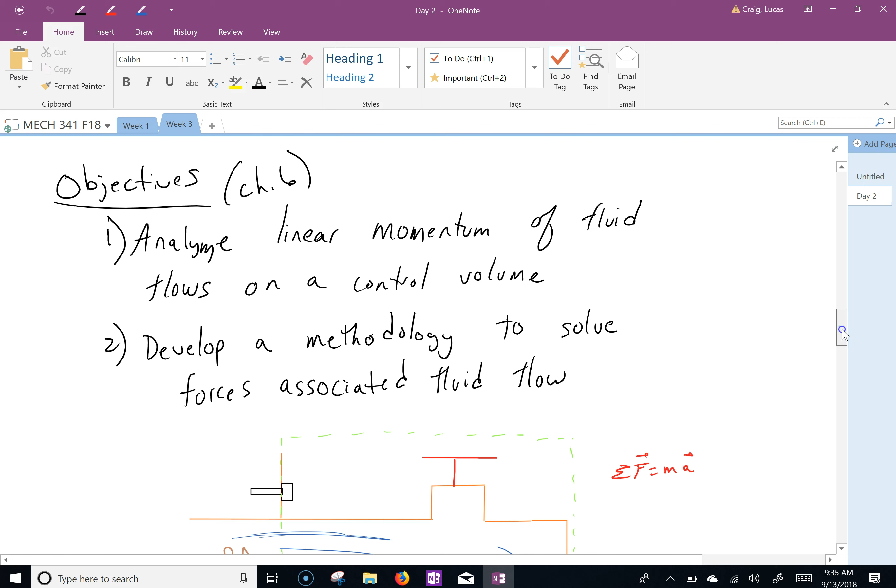Okay, so last class we started looking at, okay, the slide's moving, but the screen isn't moving. There we go. We started looking at really Newton's second law, okay? And when you start doing Newton's second law on fluid that's moving, it's called linear momentum analysis.

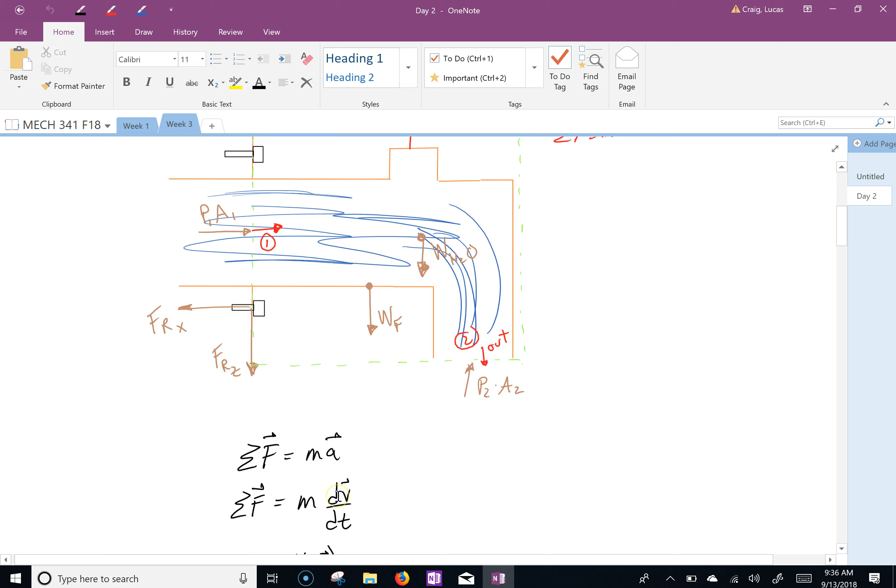And we still start basically with, right there, the sum of the forces equals ma. You still do that. But what we end up doing is we have to add these other two terms here. These other two terms are really the forces generated by the fluid coming in and going out. That's basically what it is.

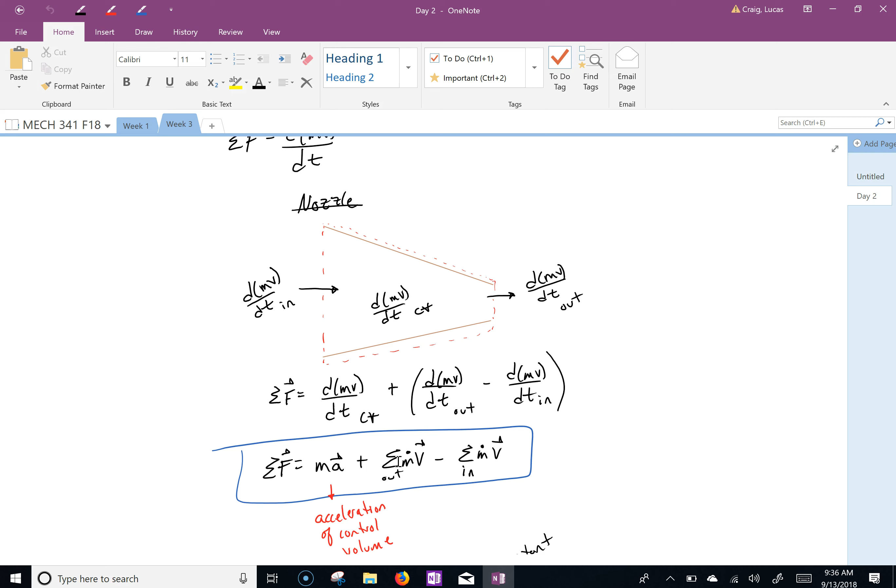And so up here in this spigot, we labeled all the forces: pressure, weight, pressure. Then we labeled what's coming in and what goes out of the fluid. And those are the two forces that we have to include. Because really, you have fluid moving. If you know the mass flow rate of a stream of water and you know its velocity, that gives you the amount of force that if you shot that on a force sensor, you would read.

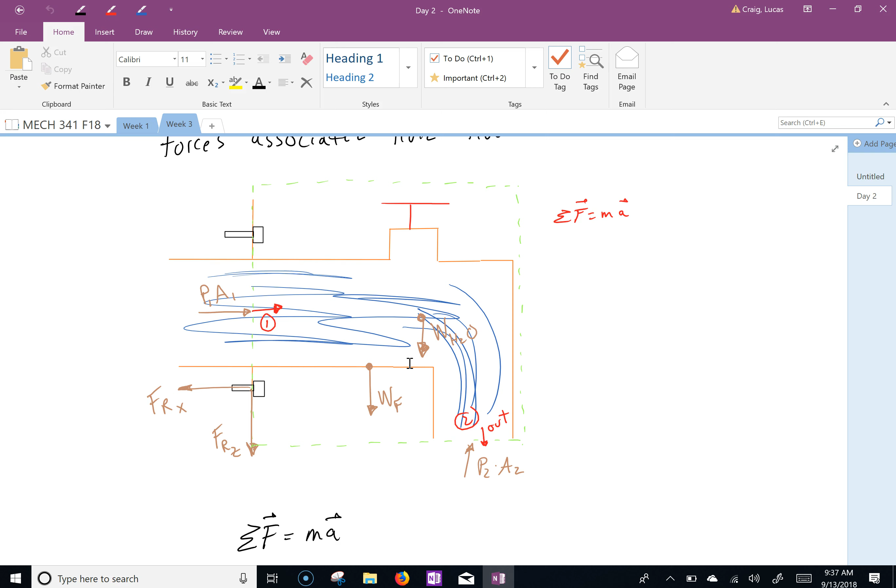Same thing with a helicopter. If a helicopter is going up, if you know the speed at which the air is moving and the mass flow rate of that air, that's basically the thrust that it's creating. And then last class we did this. We had an engine mounted on a stand or a sting, and we wanted to figure out what the actual thrust would be. Because this isn't moving, the reaction force is kind of our thrust.

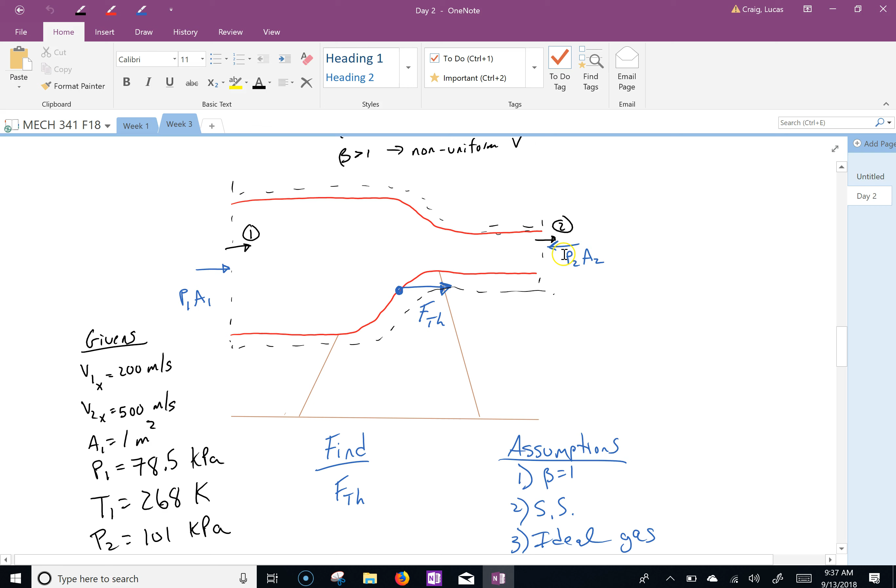So here we have our control volume, which is the black. We have the red thing, which is our engine. We have our pressure forces, and we then did Newton's second law in the x direction, or linear momentum, to figure out what this thrust force would be. So you have to include all your external forces and all these momentum forces from the fluid on the right. Questions on that? Does that make sense?

So fluid could be air, it could be water, and one of the homework problems, I think, is a snowblower. So snow can still act as a fluid. You can have snow coming into the snowblower and then it shoots out at an angle. The next time you're snowblowing, you're going to be hopefully thinking about linear momentum.

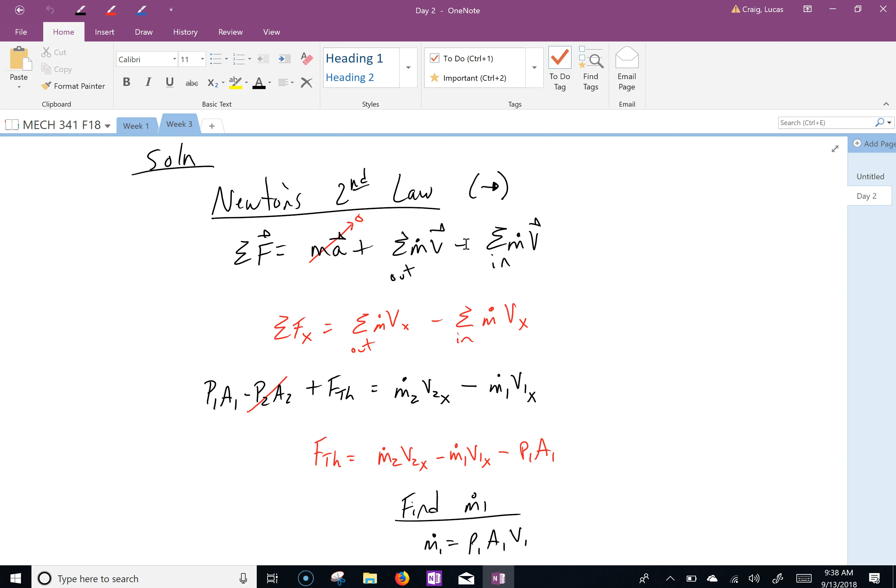Okay? I want to get into the warmth. You want to get into the warmth? Yeah.

All right. Then we did this one. Oh yeah, I forgot we did this one. So here we have some sort of water nozzle, and we wanted to figure out the reaction force in the x direction to hold it there so it doesn't move. How many times have you had the shower head at the bottom in your shower? Maybe some of you don't have the tube that hangs down. Yeah, the detachable one. I have one.

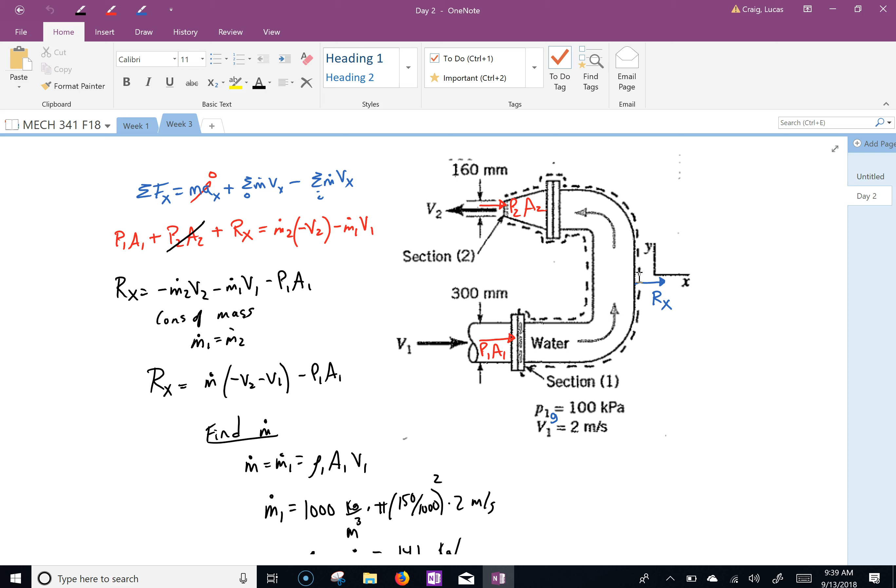Sometimes I forget, and my wife turns it on, and then what happens? It shoots backwards, and it goes all over. Well, all those little holes shoot out at some mass flow rate, some force, and then, if you know all that, you can figure out how much force you need to hold it back. That's all this is.

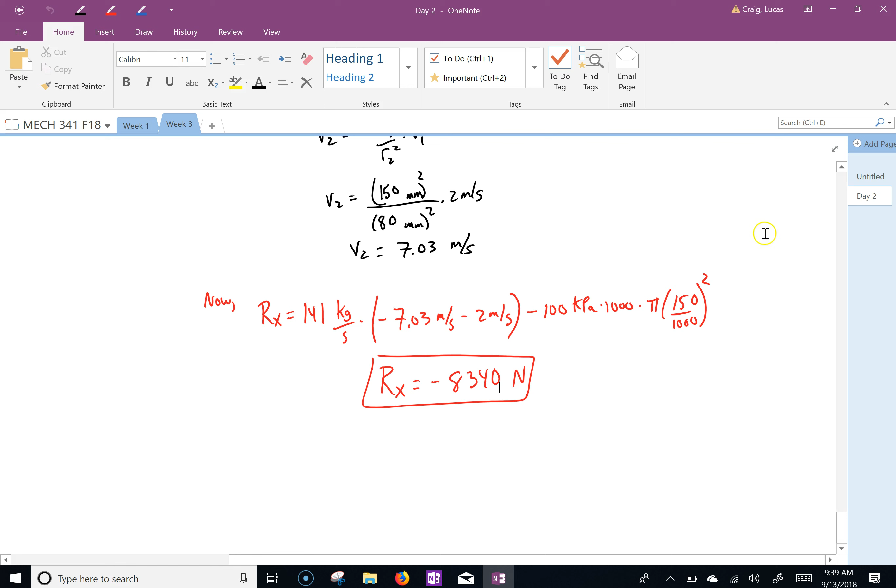All right, so let's do another pipe problem, but for this one I'm going to add a page. So this is week 4, day 1. What we're going to do now is another pipe problem, but a slightly different way of analyzing it, because you need a different equation. So let's make a sketch here. That's much better. Oh, I should have been doing that a long time ago. Oh, come on.

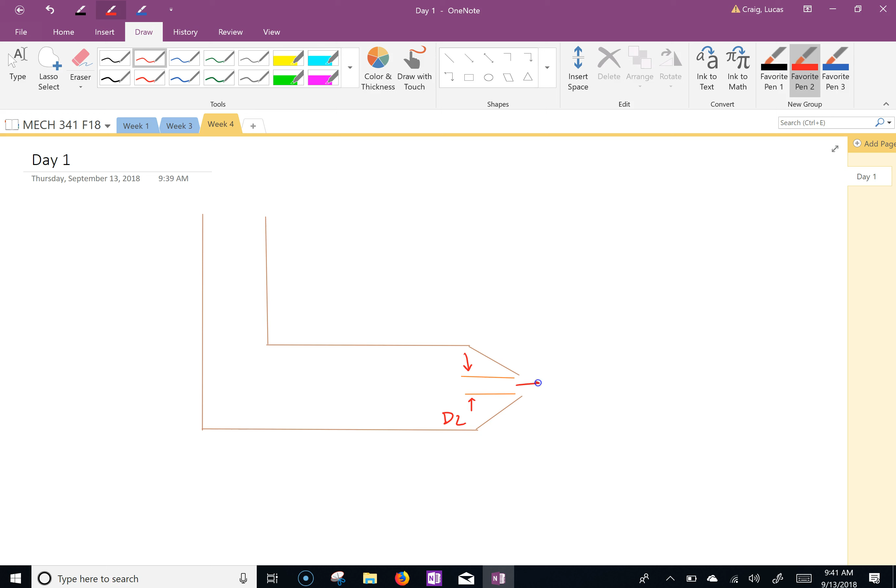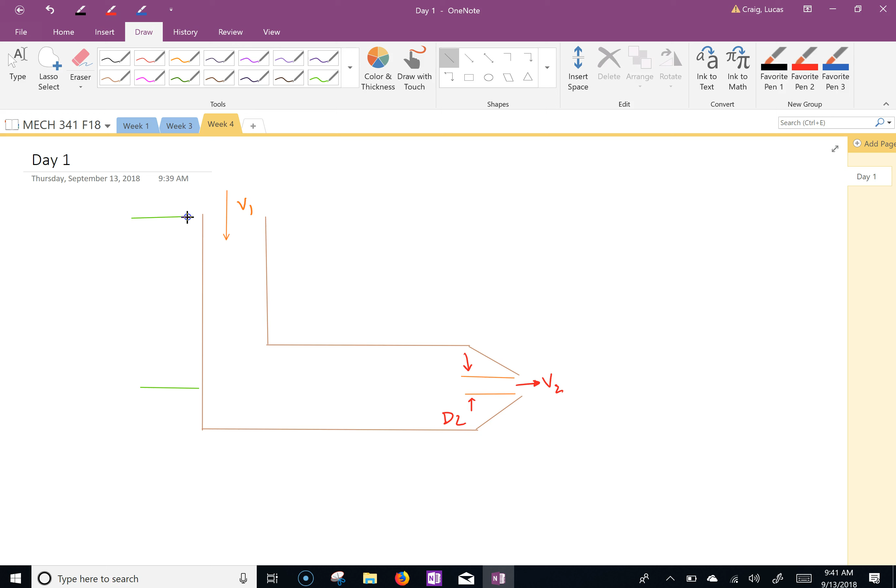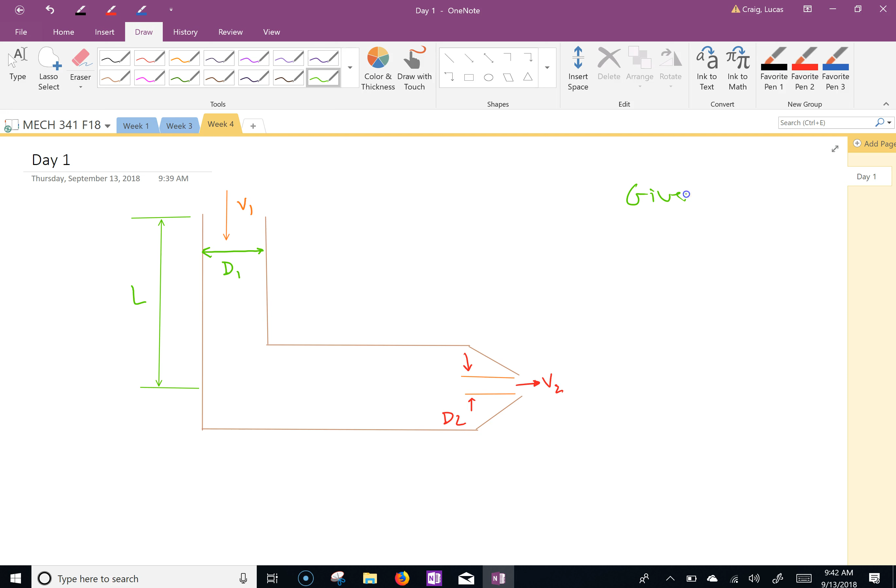So the diameter of this exit is D2, and it comes out here at V2, comes in here at V1, and let's make it light green. And how do I write there? L. And the inlet here has a diameter D1. D1 is the green, okay? Yep. We got 9 centimeters, D1.

Really quiet this morning. Tired? They're just eager to learn. That's good.

5 centimeters. Kind of something new, right? I mean, you've kind of seen this in forces, but not really with fluids. So there's water in here shooting around this.

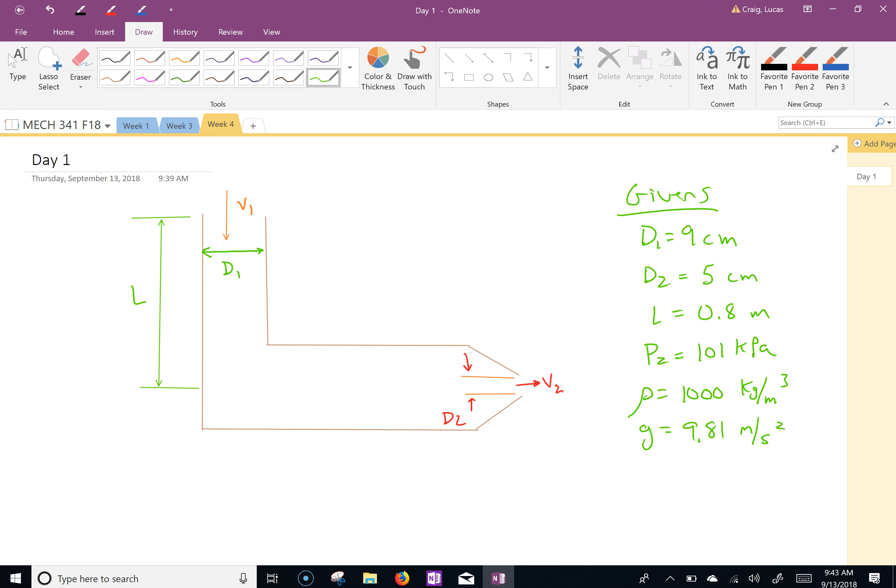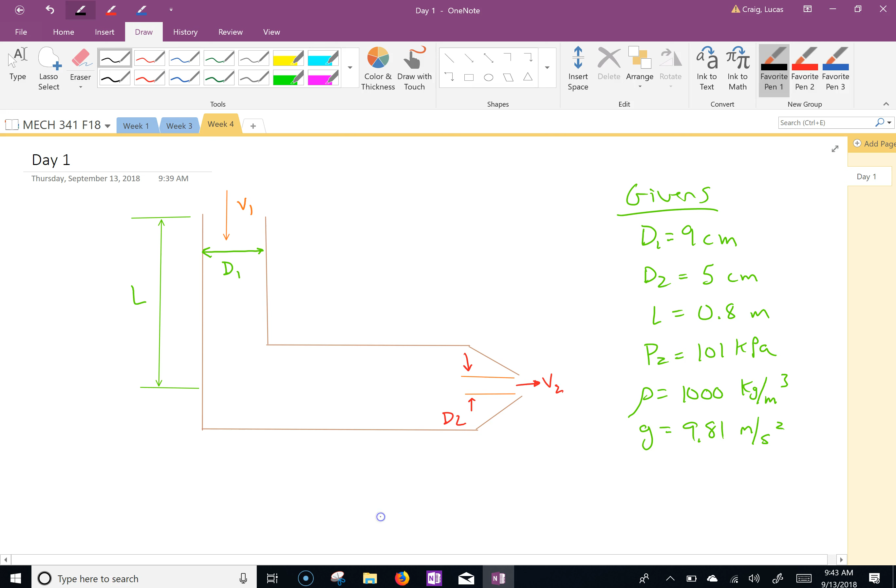Oh, and we might as well make a boundary. Can I do dots? No, but I can do this. Oh, I don't want that color though. There. So here is, the black is our control volume. So give me some forces acting on that control volume.

At where? 2? Good question. At state 1, we cut it. There's a pipe there, so the water comes in. So there's a longer pipe up here, and we just kind of cut it right here. We know the pressure here, the gauge pressure. So yeah, there's actually going to be P1 gauge times A1 as a force. And then at state 2, it's going to be P2 gauge A2.

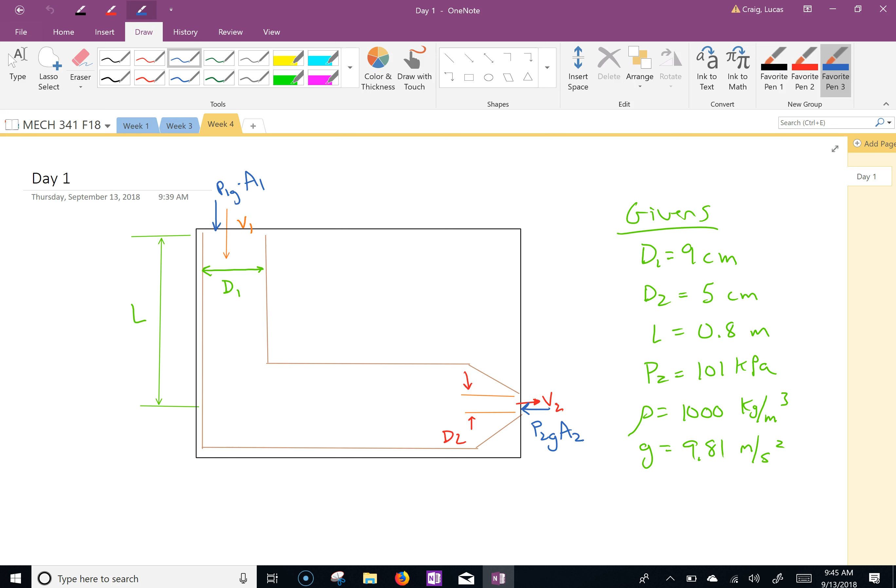And we know over here there's going to be some resultant force FR. And we can split that up into components, so we have Fx and Fy. So if we wanted to build like a little stand or design something, we can hold it at that spot right there, okay?

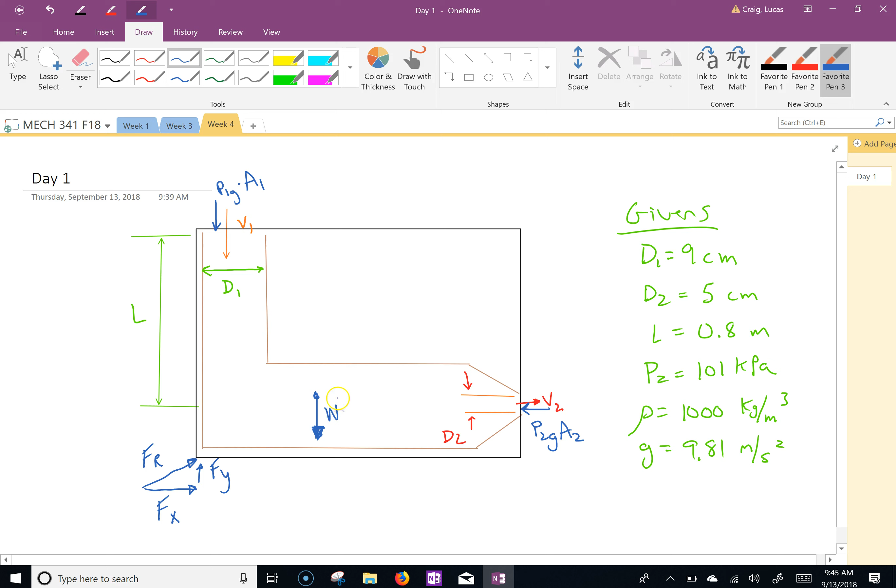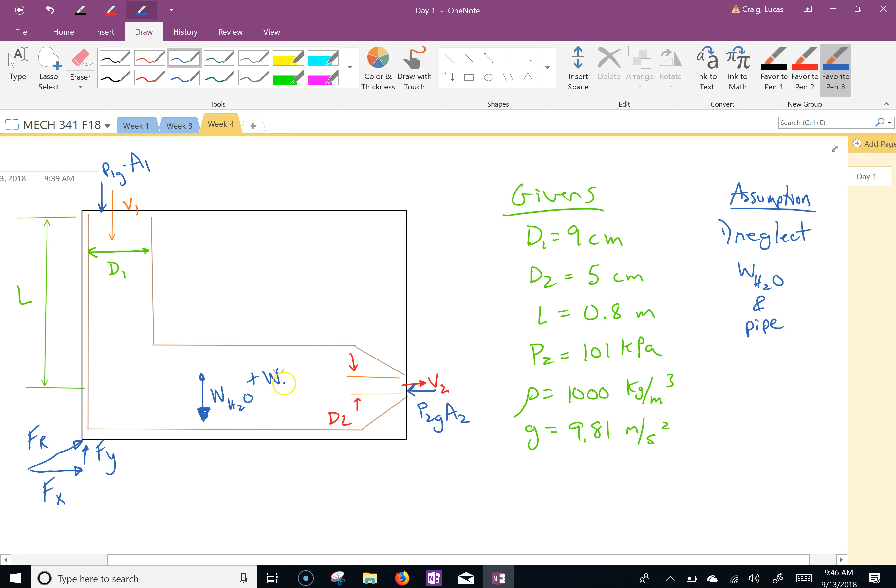The other thing we have is the weight of the water. We're actually going to neglect that, so that would be an assumption that we can write down. You could include it if you wanted to, but it doesn't make a huge difference. And I guess the pipe, right? You could include W of the pipe. Typically, those are kind of small compared to what the forces of the fluid are going to get.

So, other assumptions. H2O is incompressible, so that validates our density. We have 2D flow at steady state. And do you remember beta? Beta equals 1, meaning that V1 and V2 are uniform at the inlet and outlet. And when you do the ANSYS, you'll see that typically in a lot of the pipe flows, betas are not 1. The velocity at the outlet or inlet isn't usually going to be the same all the time. Okay?

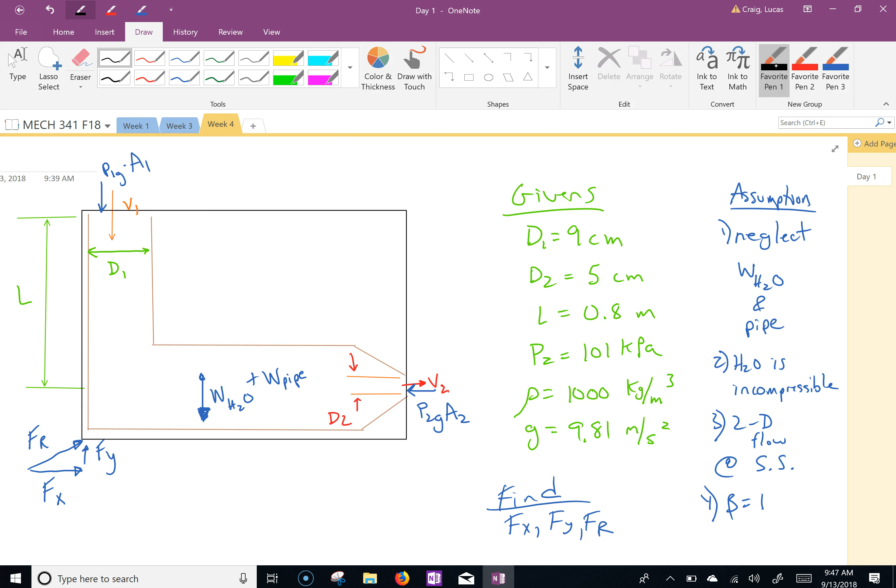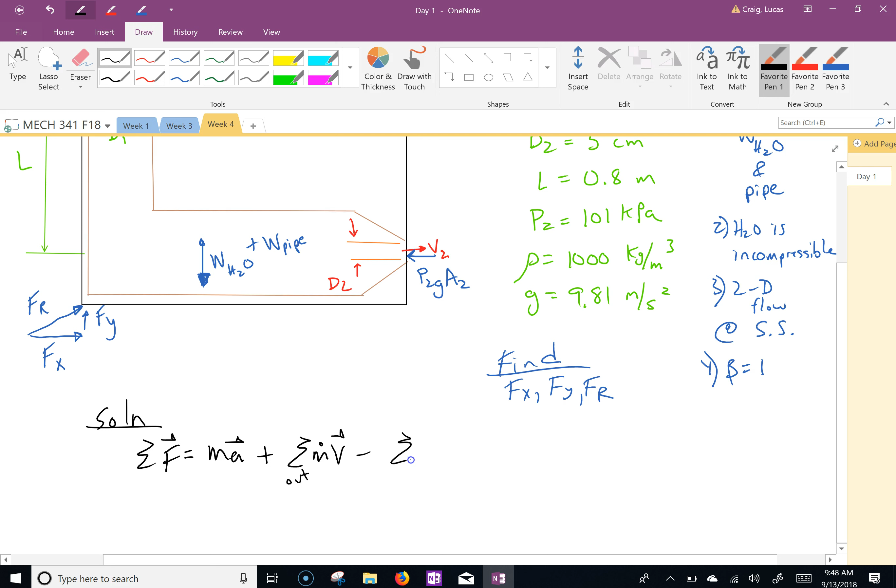Okay, where do we start? We need to write or find Fx, Fy, and the resultant Fr. So we did our free body diagram. We labeled what's going in and going out for velocities. Now we can start the solution. So we're going to start always with this. I meant to ask you about the subscript X on those also, is it only the X direction that we're concerned with? On the last problem, it is, but this one is 2D, so we're going to have X and Y. Yep. And actually, I forgot a heading: Newton's second law.

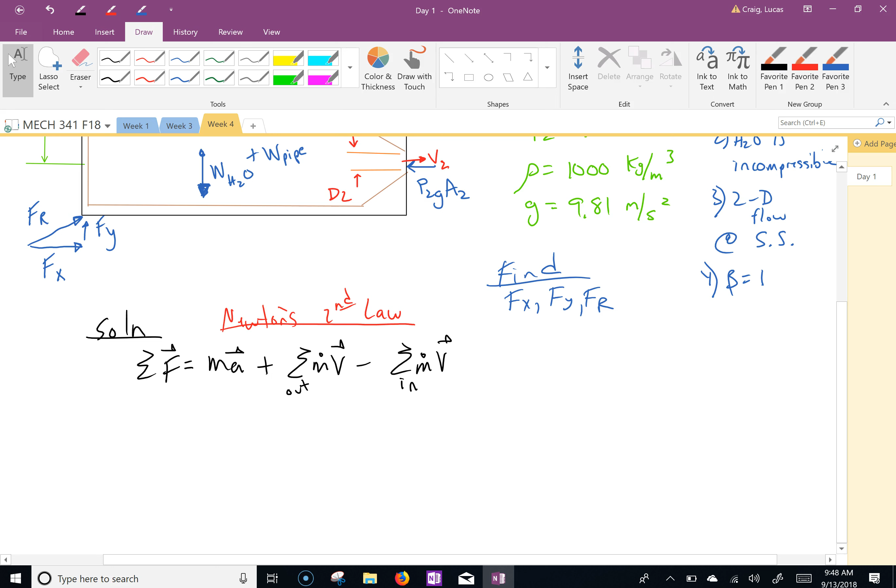So, we're going to have two directions. But what can we cancel first off in that? MA, because that nozzle, we're going to assume it's stationary. We don't want it to move, okay? Then we have the X direction and the Y direction. Now, you've also seen the I direction and the J direction, right? X is used for I, so don't worry about all that. I like to stick with just X and Y, so I'm just gonna rewrite this. It's easier for me. I'm okay if you don't, but if you mess up, then I'll tell you maybe you should have written that down.

I like making comments like that on your paper. Like, the beginning fluid students. I know I told them to do this problem just like this. What do they do? Don't even do it right.

Don't even label anything. Oh, these aren't vectors, sorry. Those would be X, right? I got carried away.

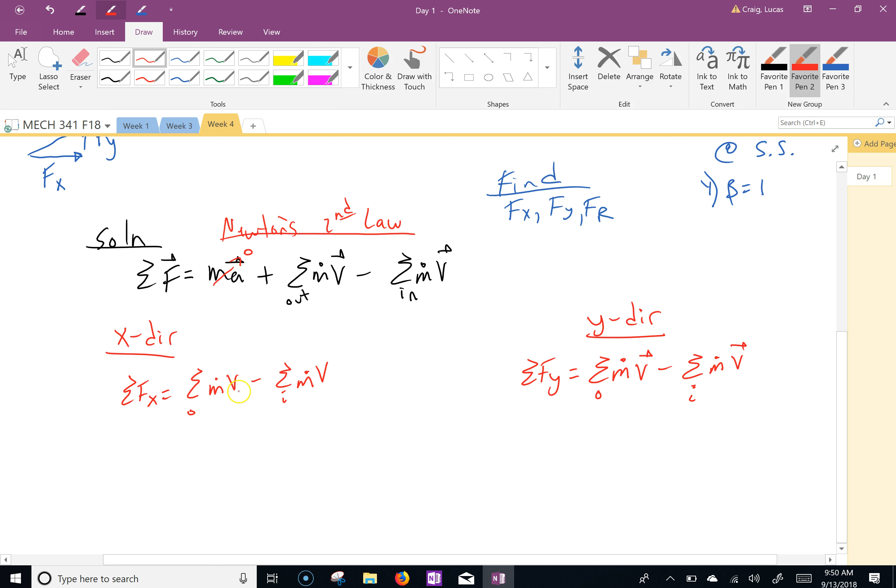Now you can write a comment about me.

All right. We okay right now? Keep going. Forces in the X. I have positive Fx. I have minus P2 gauge A2.

Where's that coming from? Sounds like it's over here. It's all offices out there, though. Yeah. Big conference room. It could be. Maybe there's a conference in there too.

What, in the X direction, do we have anything coming in for fluid? We only have it going out, right? Right. And what do we call that subscript? 2. So can you cancel the M dot with some? Yeah, sure. Yeah, that's 0. I was wondering what you were asking. Yeah, you can do that. What about P2 gauge? It's 0. We can get rid of that one too. The X direction is weird. Yeah. Because we do gauge.

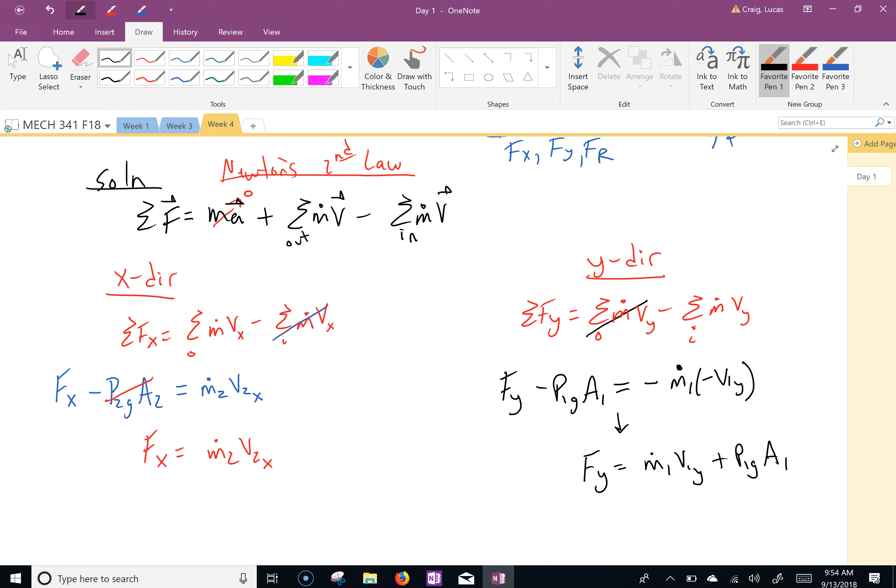To find pressure, to find mass flow rate, you've done that in basic fluids. So, what do you want to find first? You want a mass flow rate? Okay. Can we do something first? Conservation of mass to help. What does that state? M dot 1 equals M dot 2. Exactly, because the mass flow rate in equals mass flow rate out. And we'll just call it m dot.

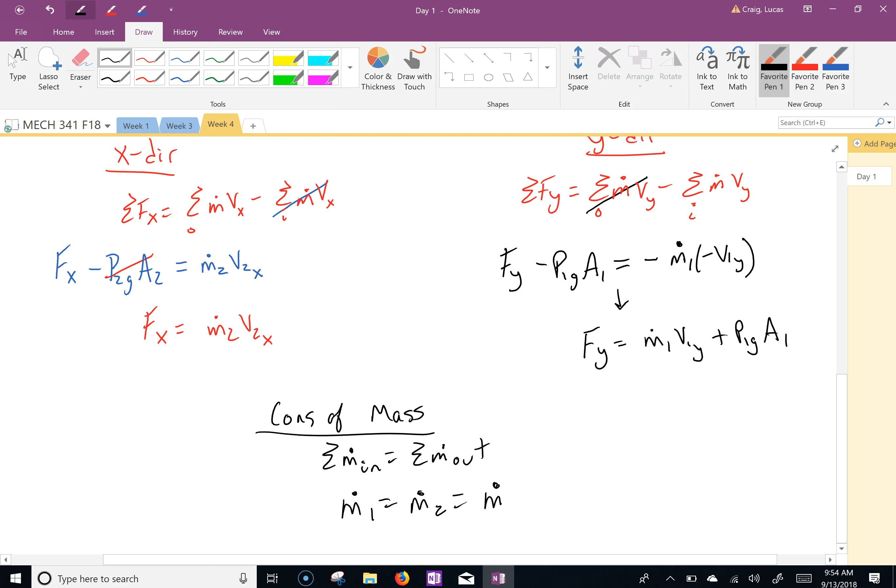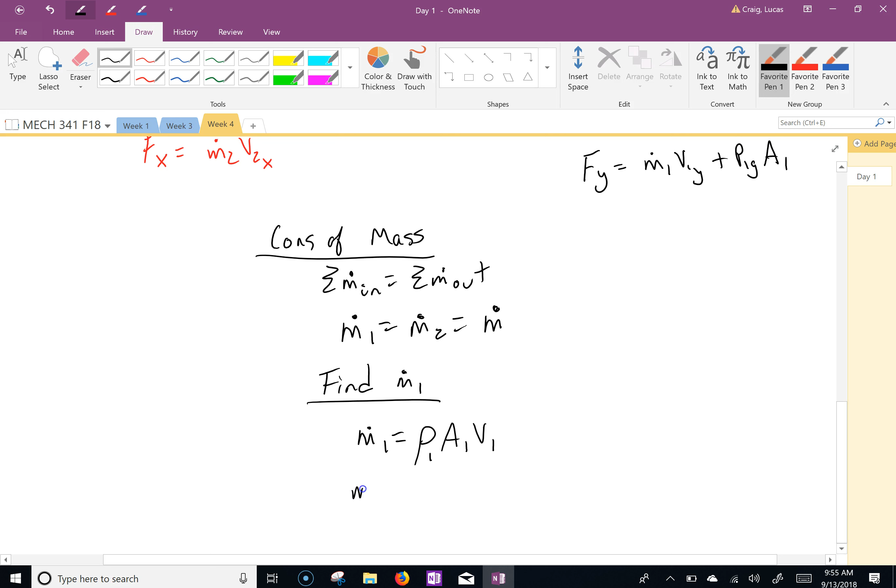And then we can now find m dot 1, which is rho 1 A1 V1. Density is 1,000 kilograms per meter cubed times pi. Oh, I'll break my rule. I don't care. You've graduated.

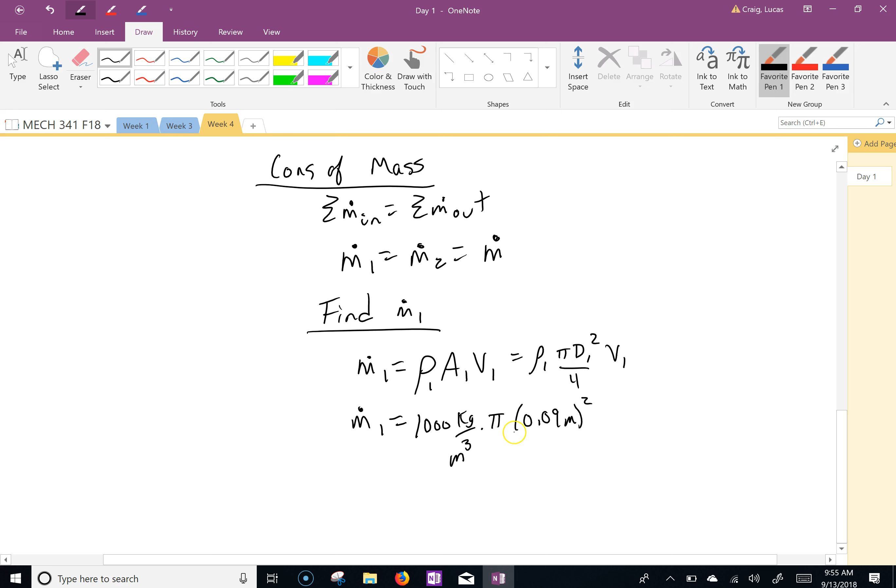Come on, erase. Is it pi d squared over 4? Yeah, let's do that. So diameter 0.09 meters squared over 4. And then times 6 meters per second. Did I miss something? 1000 pi d. Nope. And you end up getting 38.17 kilograms per second.

I think that was where we go down the velocity. V2. No, only V1. Oh, did I write that? Not write that in the givens? No. Oh, I'm making stuff up. You're right. My bad. I didn't give you V2, but you can find it, right?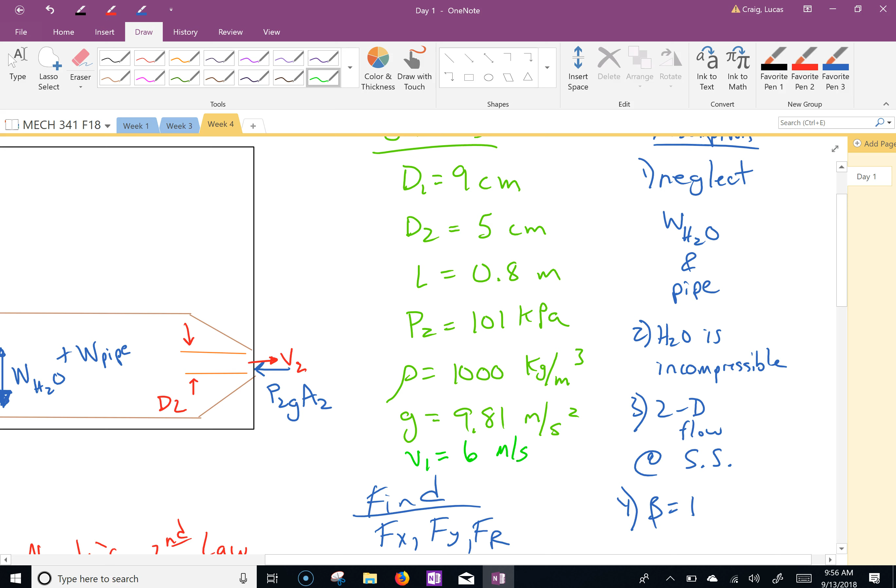What direction is V1? It's going in the y direction or the j direction. Yep. So if you wrote it in vectors, it would be 0i plus negative 6j, right? Just for reference for any future stuff. Wait, are you going to give us velocity in vectors? I won't. But just for future, if you have engineering from another school, they might do that, just to remember. Okay, yep, we got it.

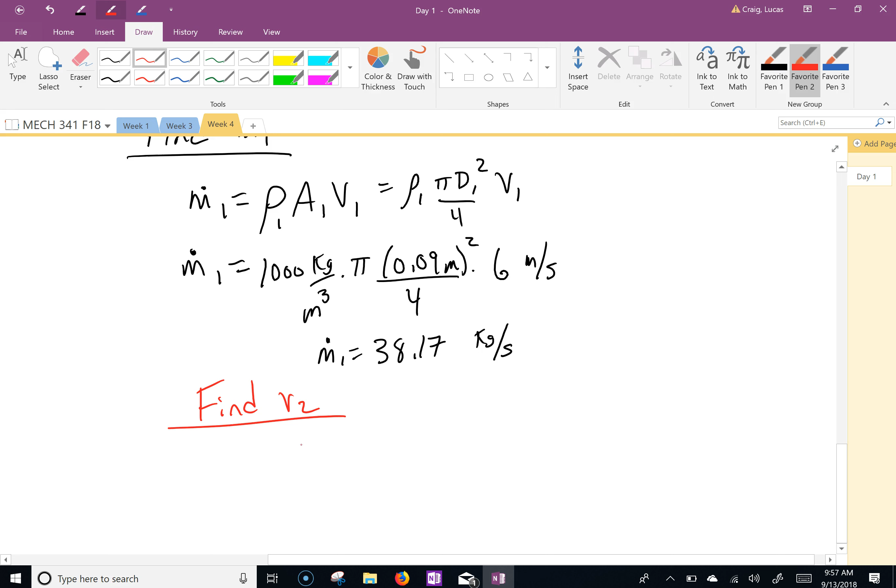Okay, now we can find V2. So we know that m dot 2 is rho 2 A2 V2. We'll solve for V2. And just to save some time, you get 19.4 meters per second. And just for future too, the area 2, because we're going to need to know that maybe, or if you found it, this area is 0.00196 meters squared, just to have it.

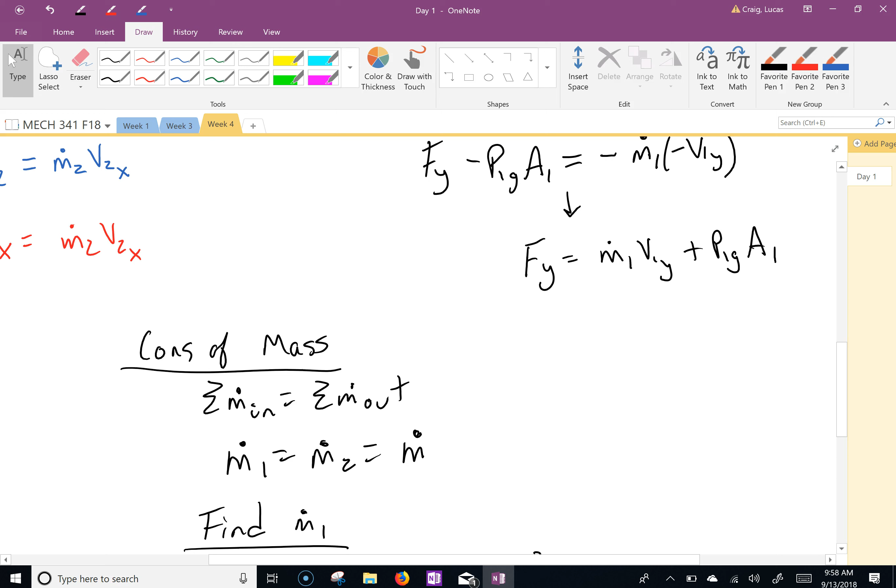Okay, so we go back up to our main equation here. We could solve Fx, right? But we might as well find everything we need and then solve them at the end. The only last thing we're missing is P1 gauge. How do we find that? Close. Close. You don't have to have atmospheric pressure. You guys are thinking right. So we're dealing with fluid, right? Rho RT? No, no. That's only for a gas. Oh. Only for a gas. Okay.

So I labeled state 1 coming in and 2 going out. What do we know about those 2 points? Certain distance. Yeah, so there's what Garrett was saying, something to do with G. Rho GH. Well, not quite rho GH, but MGH or something like that. What do we know is true at point 1 and point 2? Did it in fluids, second half of fluids. Big, long, famous equation. Bernoulli's, which means the energy of a fluid is conserved at 1 and 2. So we can use Bernoulli's.

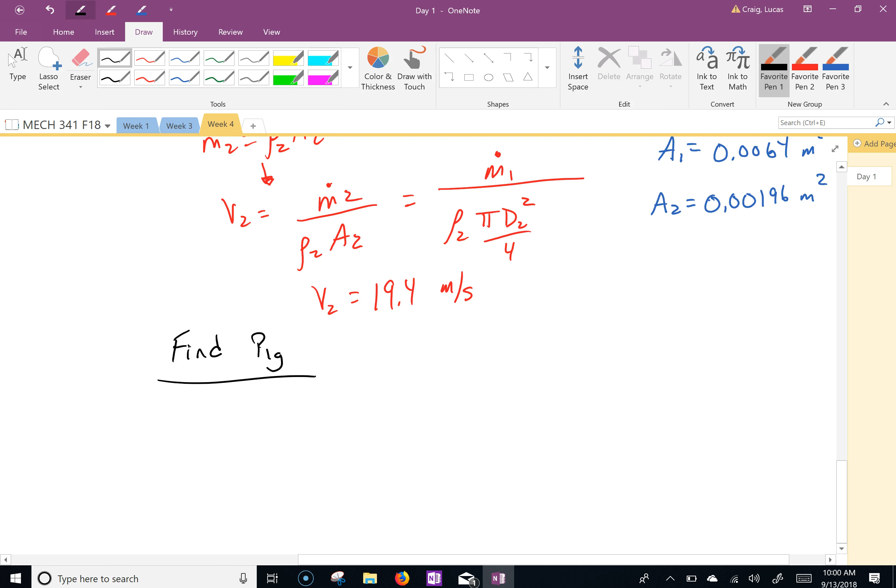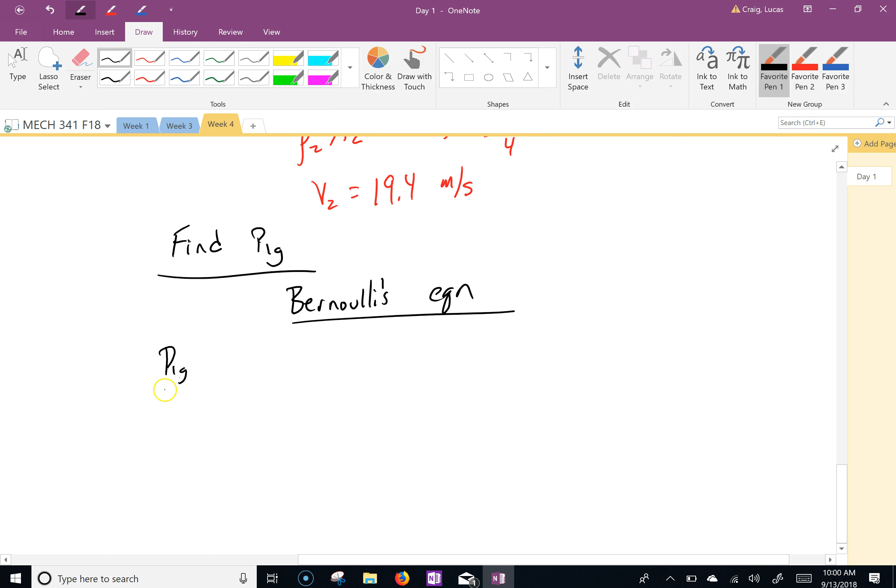Do you remember that equation? P1 gauge over rho plus V1 squared over 2 plus GZ, not rho GH or MGH. The Z's for height, right? Yes. That is going to be in the given. Pretty much, it's almost a guarantee in any problem to use G now, right? You almost don't even need to because you know the numbers by heart.

So where's our datum? At 2, yep. So that means what? That term's gone. Z1 is 0.8 meters. Did I give you that? I didn't give you L either? Okay. I didn't call it Z1. Do you remember the modified Bernoulli's?

Vaguely, David? After this, you don't write this down, so nothing in blue, but here you would add what? H of a pump, and your head loss too, minor and major, and then the turbine. So that's what you would add right there. But I don't think this is quite right because these are in terms of energy. We did every one in terms of meters, right? But yeah, you would have pump energy, turbine energy, which you subtract, and major and minor losses.

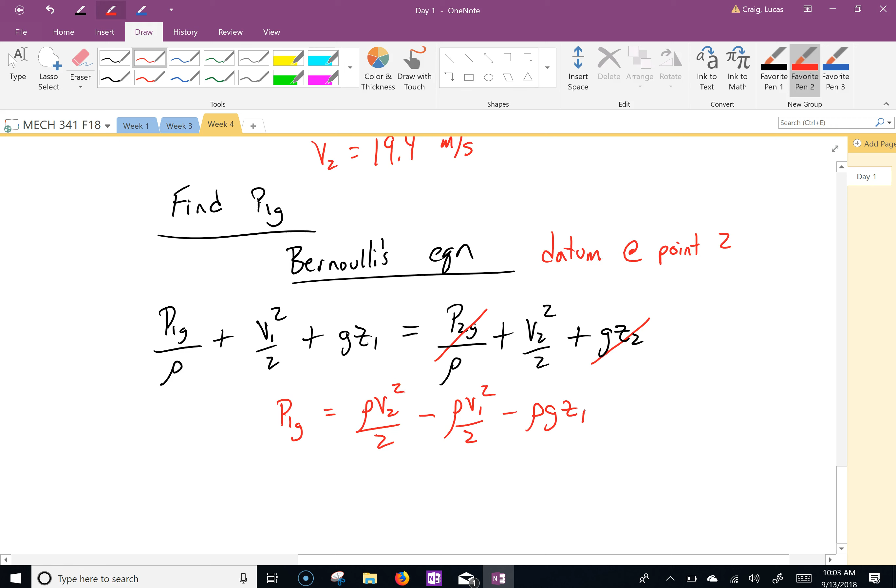I am going to factor out the density, so I have to write it three times. 19.4 meters per second squared in that whole term, not the whole term, just the top term is squared, minus 6 meters per second squared, over 2, minus 9.81 meters per second squared, 0.8 meters.

And again, do you know why we do gauge pressures? Because if you add, like if you look here, Bernoulli's is the easiest way. If we add 101,000 on the left and we keep 101,000 on the right, and you bring one over, it cancels. Okay? So there's no reason to add more numbers than you need to. It's the same way we do it in Newton's law.

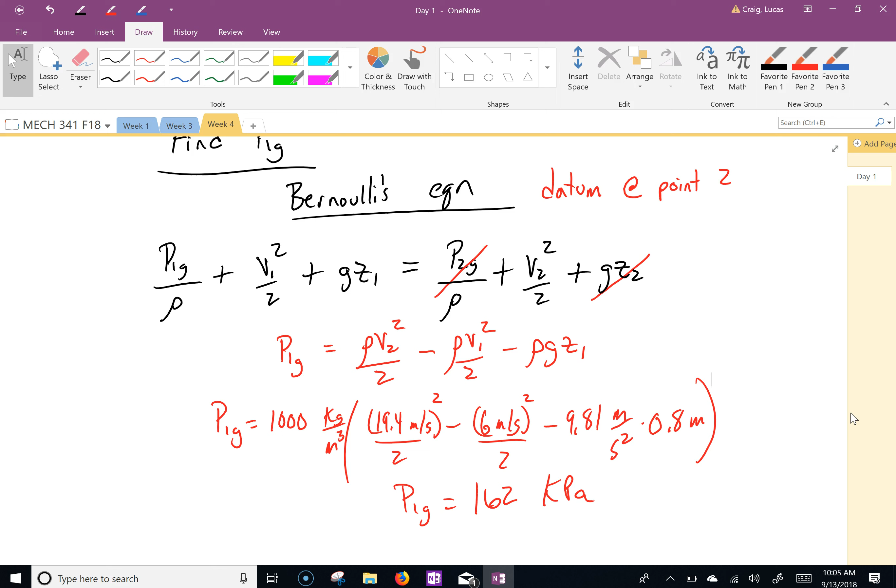So now we can finish, right? So now F of x equals 38.17 kilograms per second times 19.4 meters per second. Get 740 newtons.

And I'll do the y direction. 38.17 kilograms per second, 6 meters per second, plus 162 kilopascals times 0.0064 meters squared. 1268 newtons.

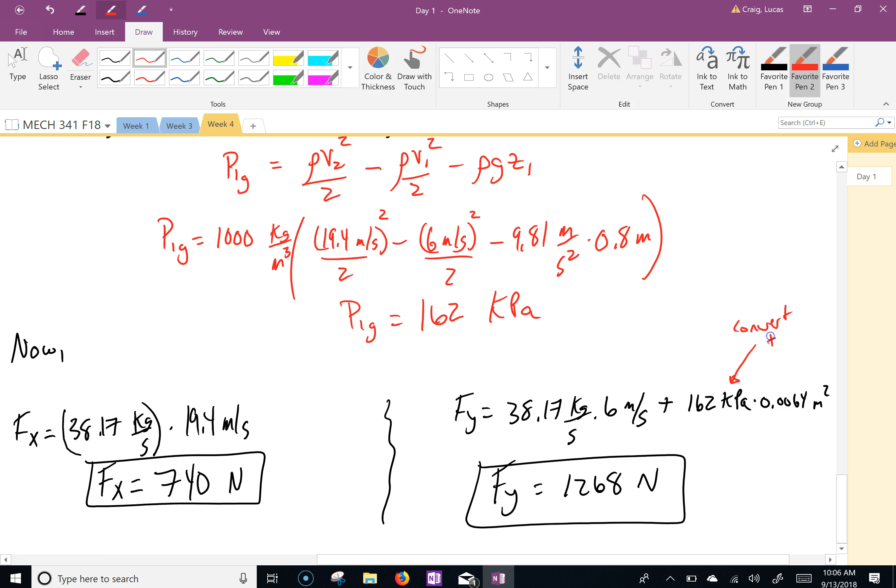Make sure you convert to pascals here. And then finally, when you do that, you get 1468 newtons.

I never did the angle, so if someone has a calculator, could you check that for me? Oh, I did do the angle. Huh.

What's that? Yeah, it's pretty good force, right? I mean, it's shooting out. What was the speed? 6 meters? 19.4 meters per second, which is pretty fast. Yeah, because 10 meters per second is roughly about 20 miles per hour. So that's almost 40 to 45 miles per hour coming out of there. Whew. When you stick your hand out the car window going 30, it's pretty good, right?

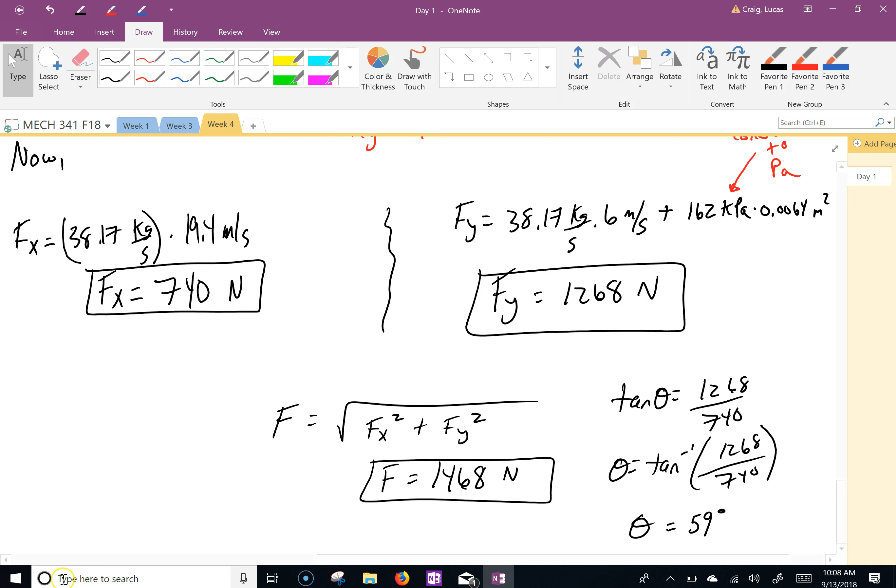So I'm going to pause this. This one I can pause. Okay, so we have water being discharged, and it shoots along this cart at 45, and then shoots out here at an angle. We're assuming that the water gap along that cart is the same from here all the way up to there. We know it's not, but this gives a good approximation.

Okay, we want to figure out what? Determine the tension in the cord to hold it there and the normal reaction of the wheels on the cart. Given the nozzle diameter, which we're going to assume is the water, and the density of water is 1,000 kilograms per meter cubed.

So how do we go about doing this? Exactly, yep. If I told you that somehow that cart was accelerating with thrust, but we wanted to figure out the tension, we would do a free body diagram on what? The cart? Yeah, okay. Remember that problem? I think you did this problem. Some of you haven't yet in dynamics that aren't in it. Remember the block sliding down a cart?

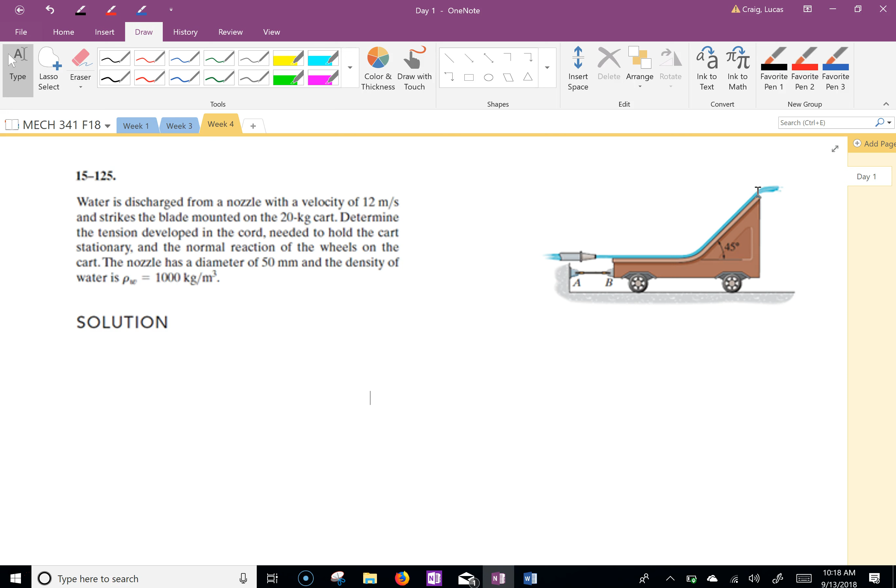Yeah, find the tension? Well, it's very similar. So let's first, right now, do a free body diagram. And I'm just going to do, actually, why don't I do this? I am going to, no, I'll just do this. Let's pretend the dot here is the cart. So give me one force acting on this cart. Or like, what do you mean by that?

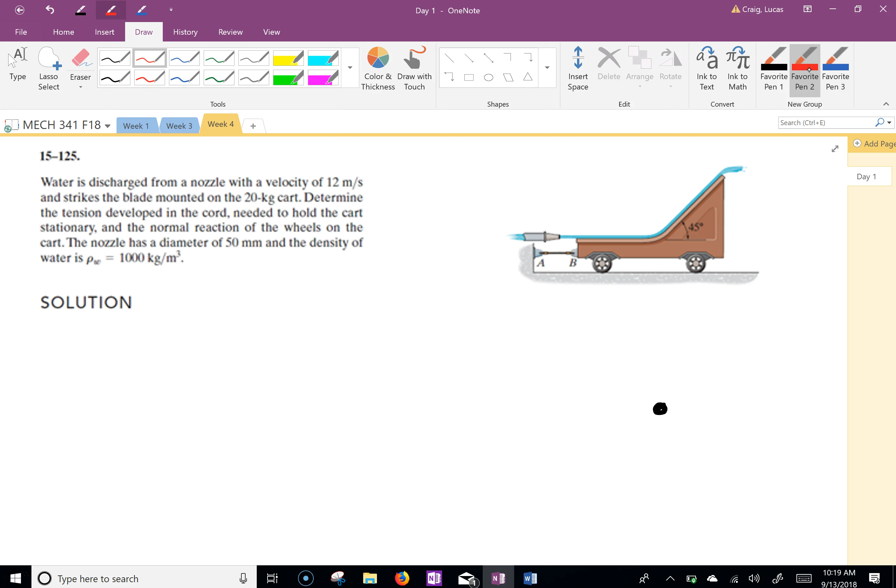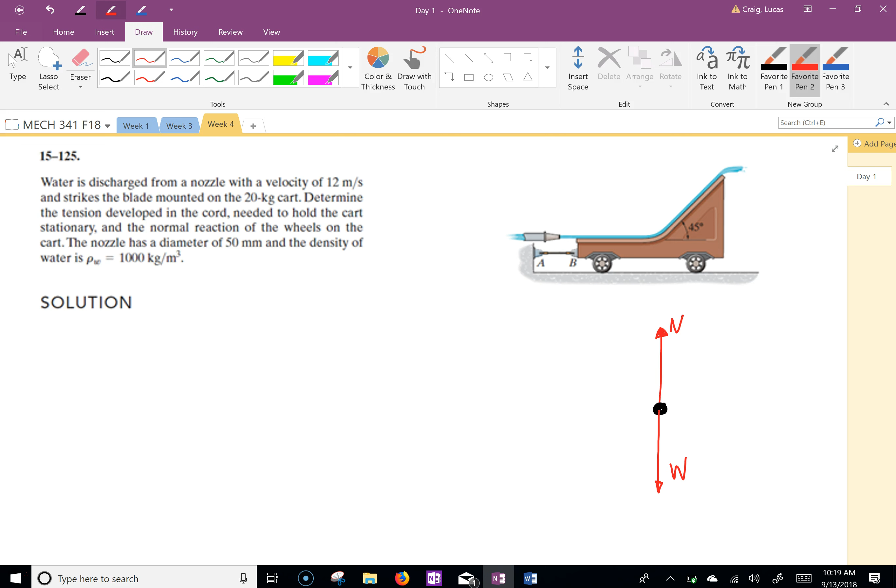Friction. I'm trying to think what it is. Okay, so we got, in the X direction, right? Oh no, no, that's we'll get to there. Weight. Then we have, I think someone said normal. We're going to assume it's, does it say anything with frictionless? No, we'll assume in the X direction there's no friction, okay? Force of the water. Yes, I'm going to get to that in a minute. What's the last major force? Tension, yeah. Now, the water, because it hits at 45 degrees, has to be how many directions?

Two. So we know there's going to be F of x, and I'm going to go down F of y. So this is the FBD on the cart.

Now, if you remember the block sliding down the cart, what did we also have to do a free body diagram on in that problem? The block. Well, here we have water, so you have to do a free body diagram on the water. Okay? So here is the water. And then this shoots at 45.

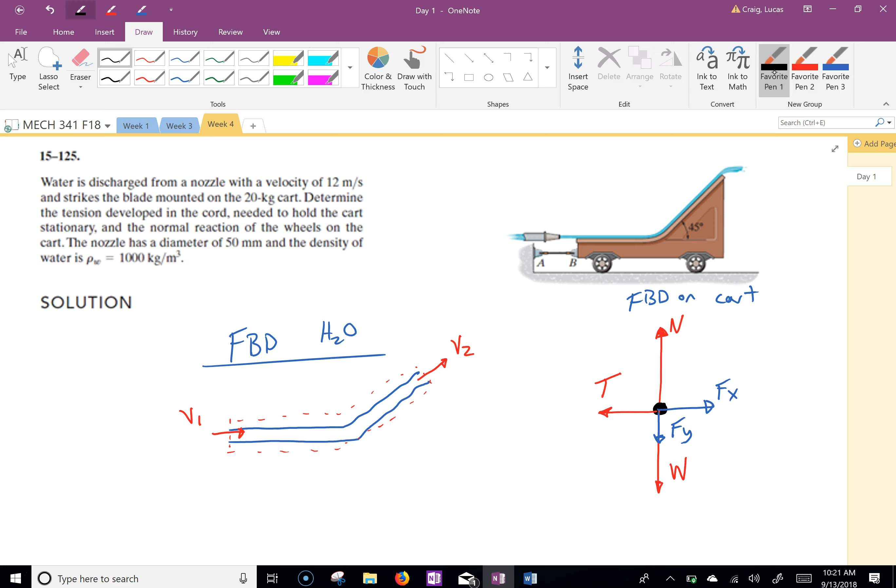And that's kind of where our control volume is. So this is V2, comes in at V1. So I guess we might as well write some assumptions here. Neglect friction, right? I need to plug this in.

You know what they should make is power cords that are a little thicker, but they have all this stuff in it. It always hangs down and then it pulls my computer down unless I put it on a chair.

New capstone. Actually, we were fishing the other day, and I 3D printed cleat boat covers to fit on his boat because we've broken two now. We put the pole down when we're fishing to grab another pole to cast. Well, it goes underneath the cleat where you wrap the rope around to hold on the dock. And then I hurry up and grab the pole, I pick it up and it snaps. So I 3D printed the cleat holders. Well, then we're like, then we can design whistlers to go on those 3D printed cleats. So as you're driving with the boat, you can make some music. So I was like, pitch that to the capstone. Or that, sure. Yeah. Yeah. But I can make some money.

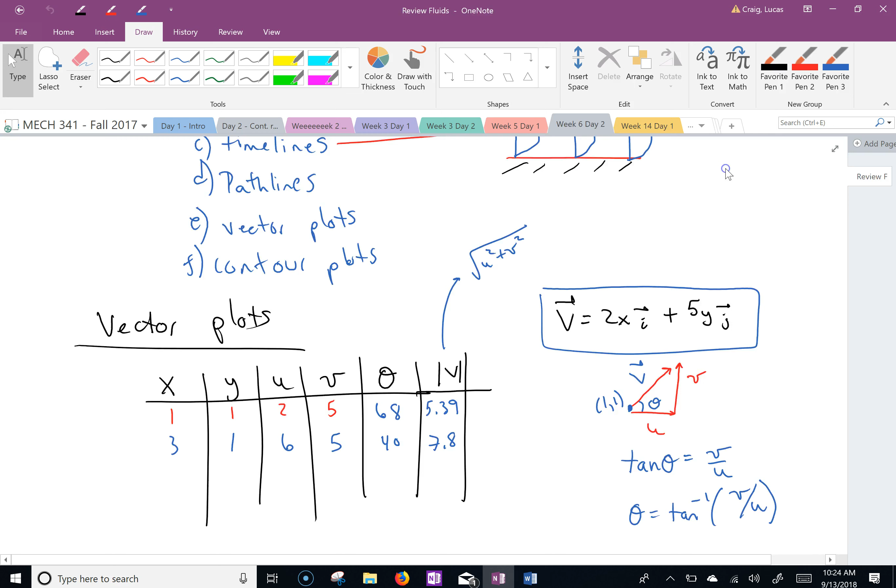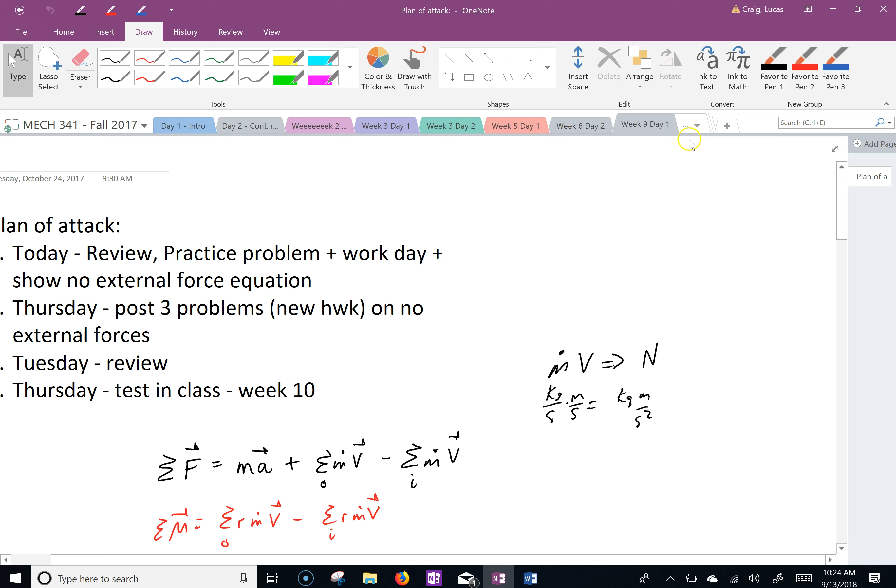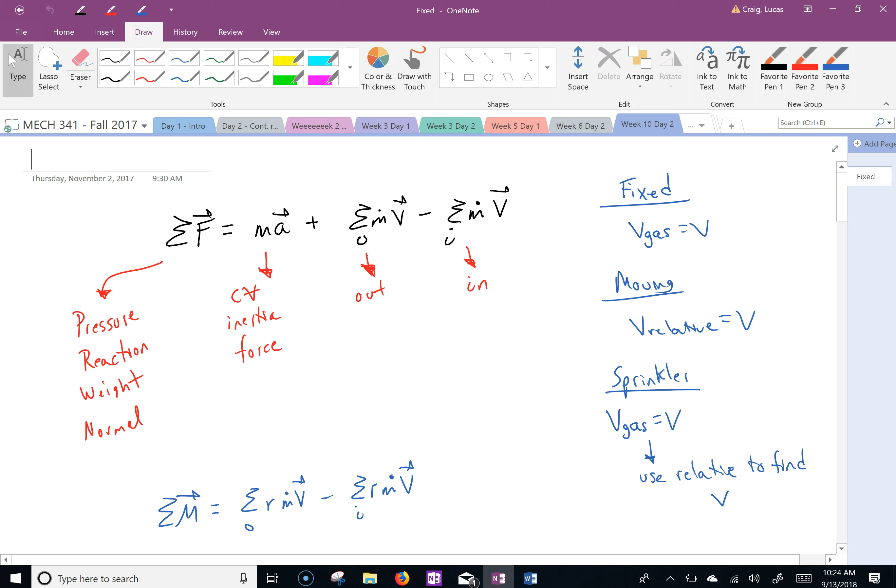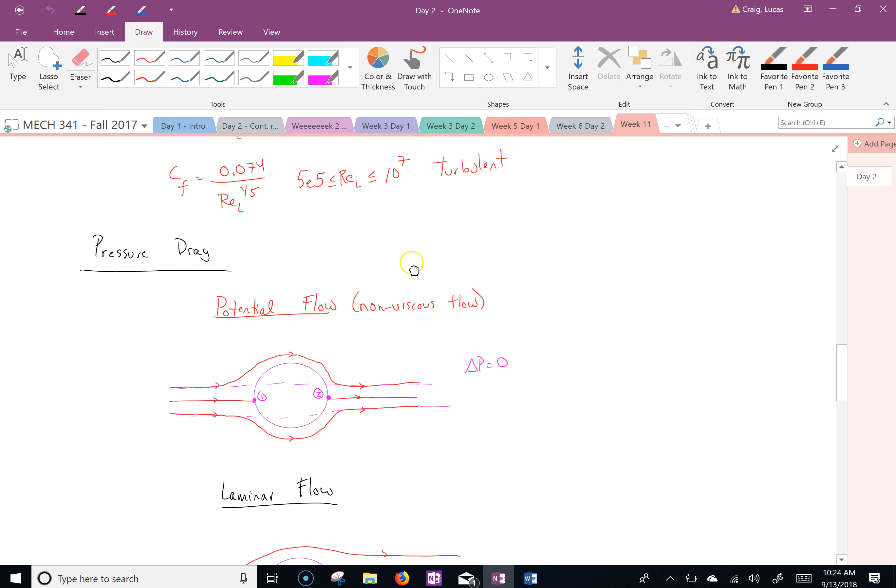Let me see if I can find it. Oh, let's see here. Give me a second. Probably maybe day 6. 8. Oh, look at that. Yep. Maybe the 9. Yep. The 10. So should we look for like the water, we're not worried about gravity on the way? Yeah, don't worry about that. Yep. Nope. See, when I did this, it was like week 11. See, some of this stuff you're going to cover. Nope. It's kind of nice to have. Maybe I never, did I not cover it?

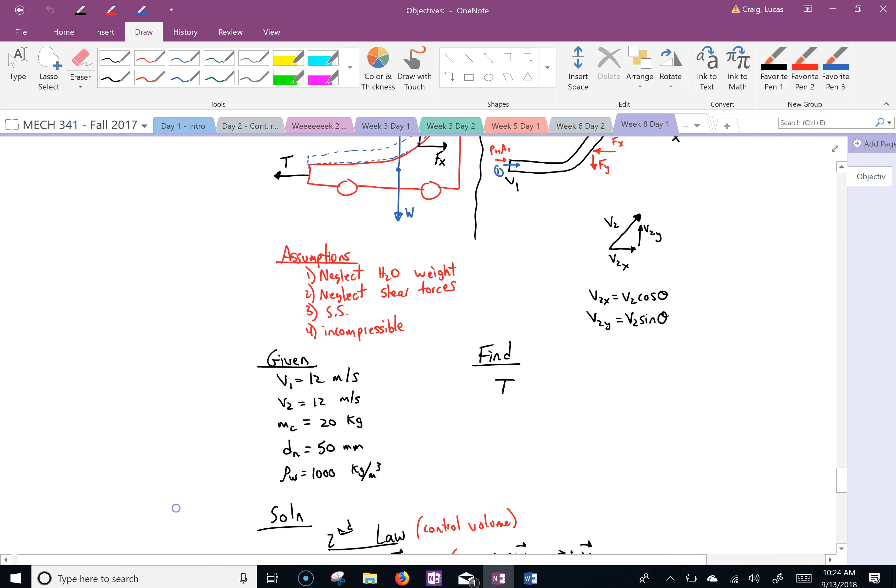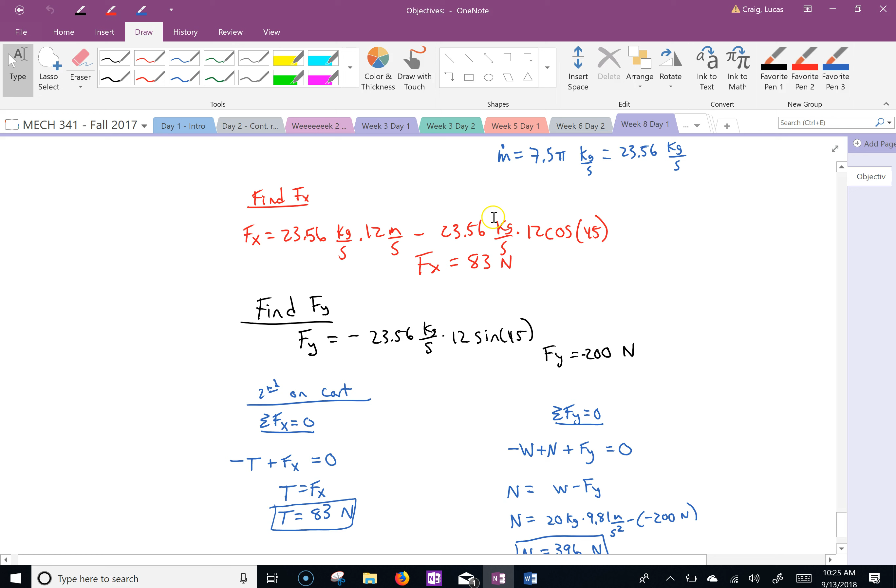Hey, there's that problem. I don't have it. So, what I'll do... Yeah. Is that this problem? I scroll down that fast?

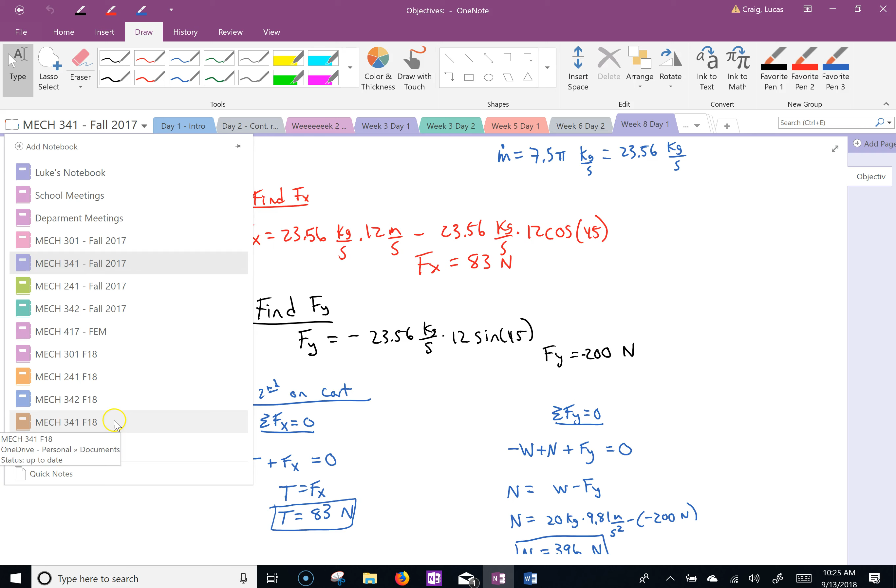So the other forces, I'll draw them and we'll talk about it, are the reaction, the equal and opposite forces that it's created on the cart, right? Because there's two things: the water and then the cart. The water creates all reaction forces, just like a normal force would, right? If you did a free body diagram on the floor, it'd be going up for normal force. So you have to include those for the water. They generate those forces, okay? Yeah, oh, did they? Sorry, I missed that. You did? Okay. Okay.

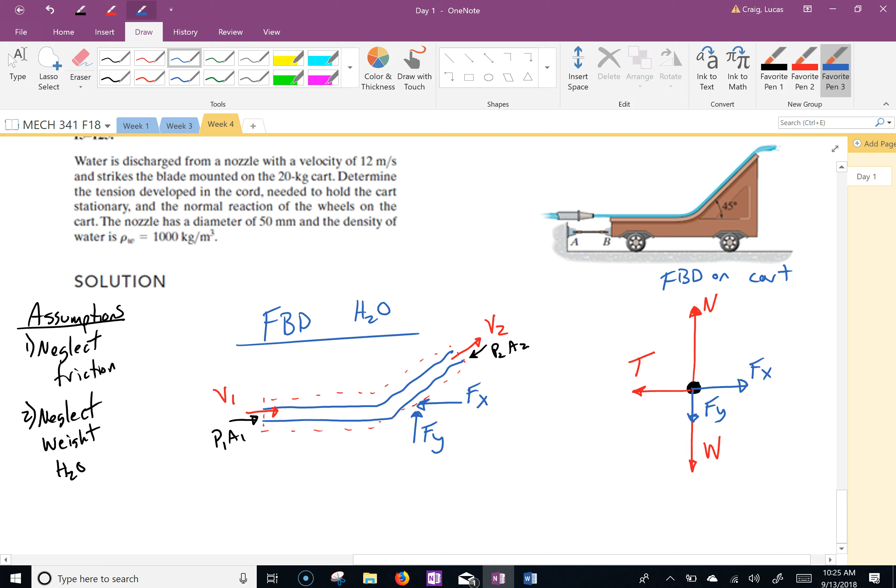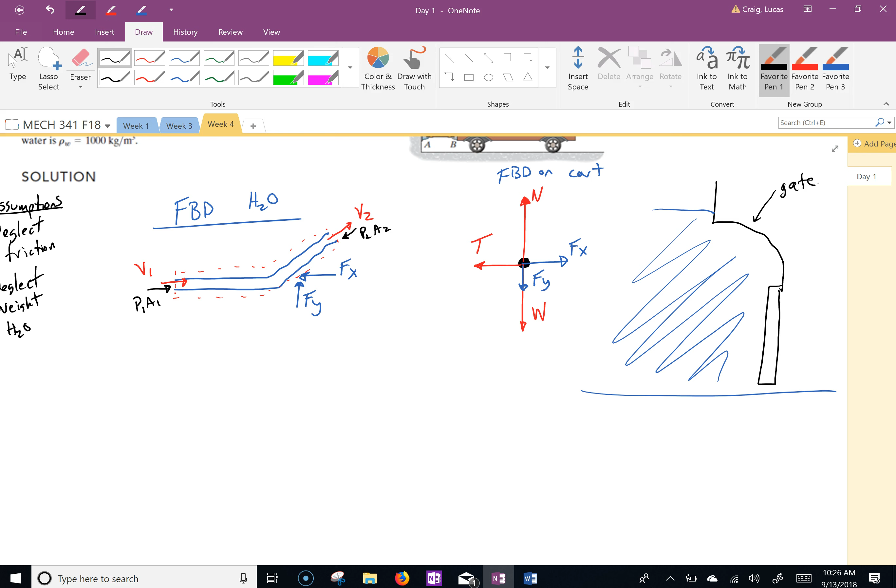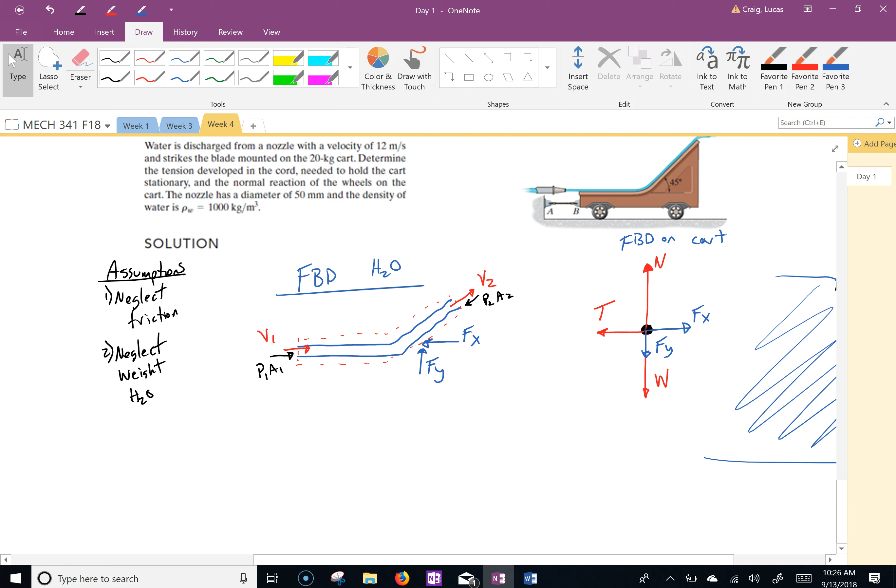And it's this, remember when we did, this is, I was trying to find, I'll show you. If you remember from basic fluids, this was water, this was a gate here. We wanted to figure out what level of water to open the gate. But when you do a free body diagram on the water, you have forces, and those are equal and opposite on the gate. It's the same concept that we're trying to do here. Okay? All right, good. Now we have everything.

Let's do Newton's second law on that first. Hopefully, by the time you're done, you've memorized this equation, right?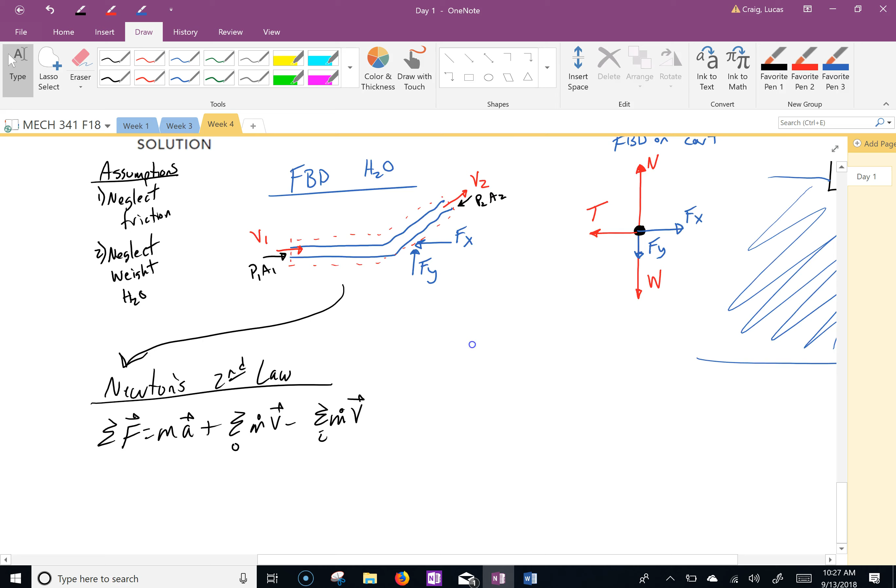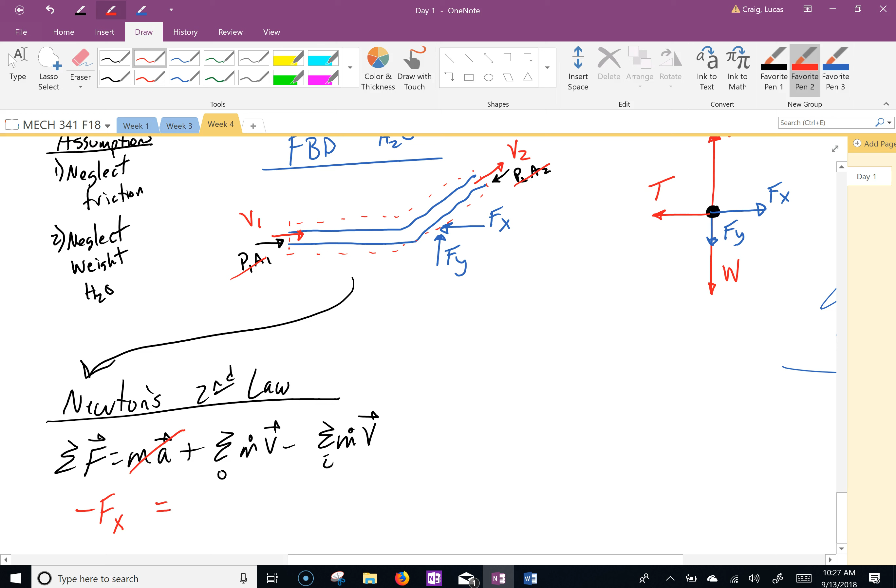You can cancel that. We have negative fx. What we'll do is you can cancel in the sketch your pressures. So I put red lines through the sketch. Because we know they're gauged, you're going to be zero. Then you don't have to worry about adding those. I'm fine with that. So negative fx, and anything coming out, there is, right? Yeah, which is, you write m dot 2, then it's v2x. All right?

Okay, and then we do have stuff coming in, right? M dot 1, v1x. So this one has, see how we keep doing examples and keep having different things in there? So now you hopefully have enough. So I'm going to switch the signs. And substitute what V2 is in terms of x. That would be what? V2 cosine theta?

Oh shoot, I did it again, Joe. You can yell at me. What'd I forget?

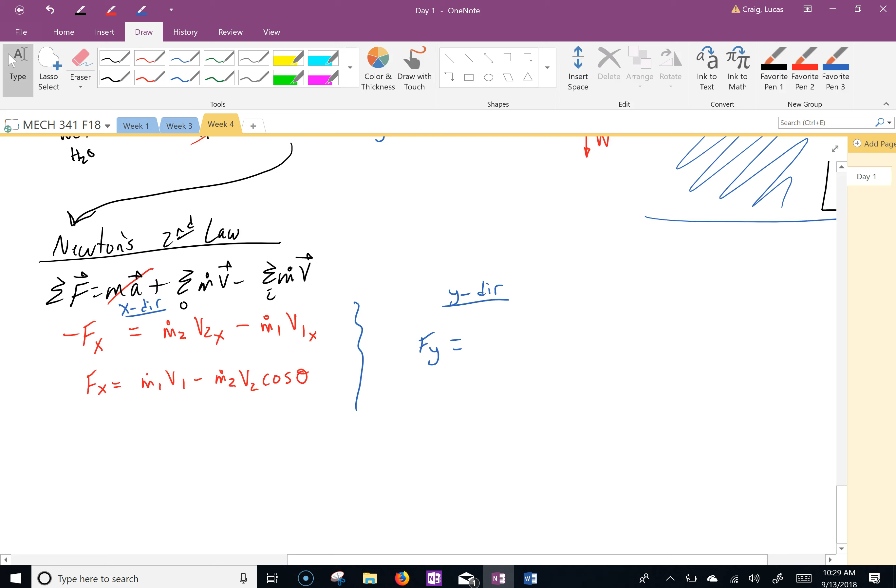Got a heading, y direction. We have f of y equals... oh, let's see here. Oops. We're neglecting the weight of the water, so we don't need that.

Hold on, wouldn't f of x be positive to start with and fy be negative? Wait, no, I flipped it. No, we're assuming positive is this way. I don't, no matter how I did something... I didn't switch that.

And in this case, anything coming out there is, right? It would be, yes. So m dot 2 v2y, and there's nothing coming in, so we can put minus 0.

And I'm skipping some of the steps just to make sure we cover all the basics. So this would be a sine, right? Is that what I heard?

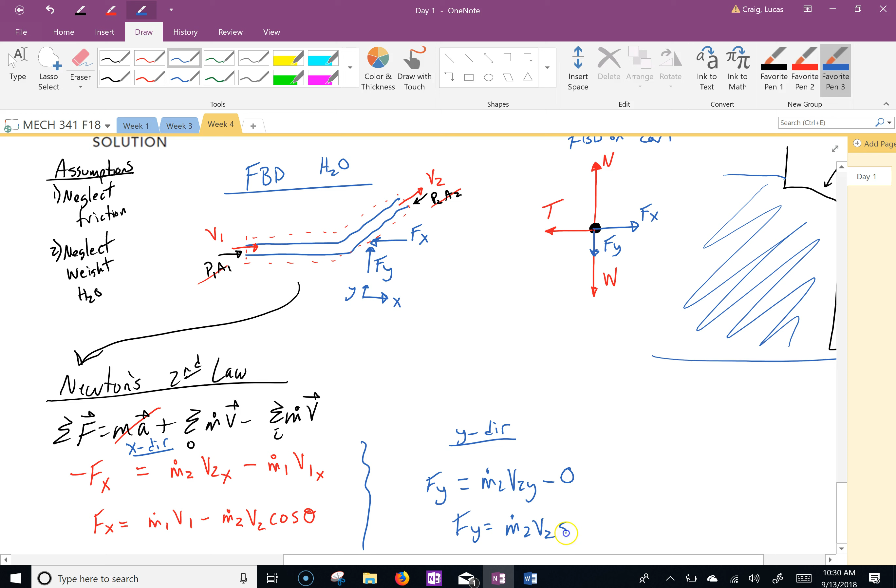So you use these two, which we find, to then do what we need to do in the cart.

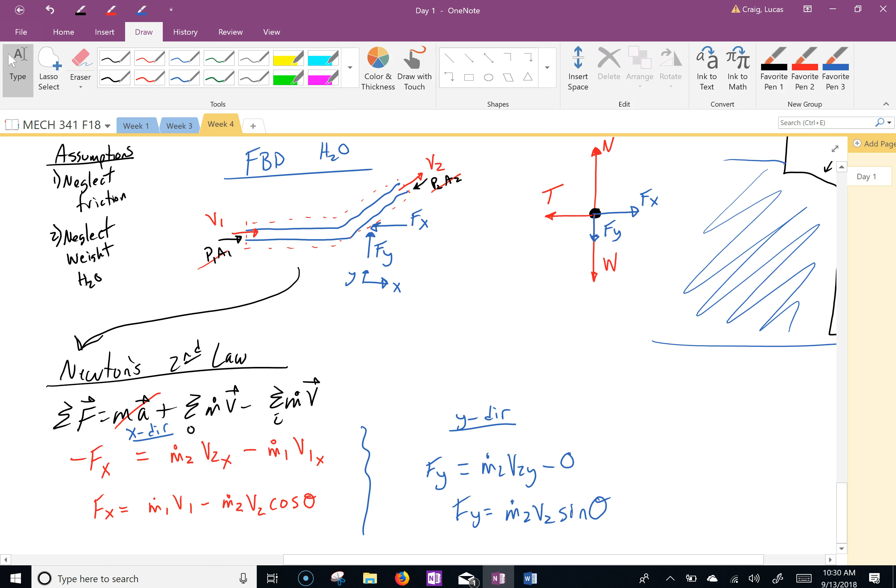Is there a reason why the second equation on the f(x) is not a negative number? I switched it, and so therefore I made that term positive here, and brought it over to the left. Oh, and then I made that term negative. I brought it to the right. Just easier.

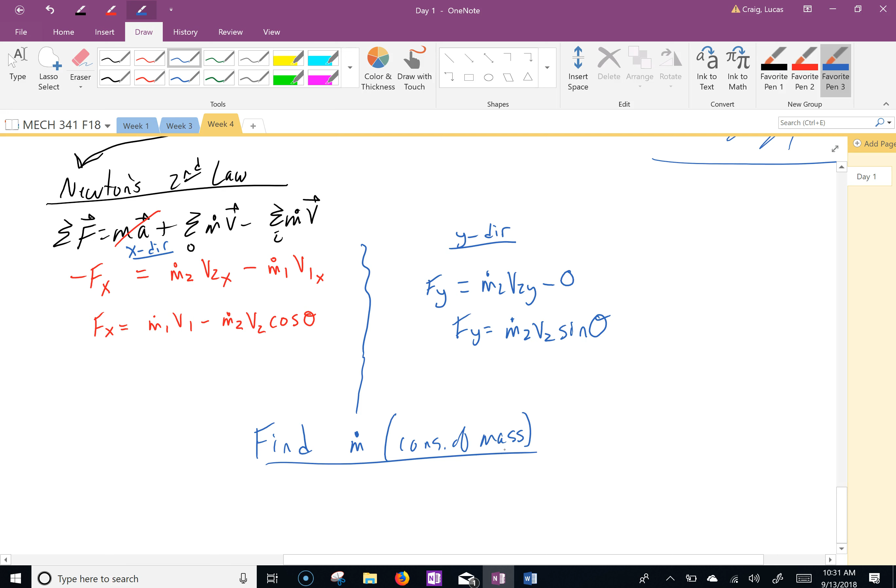Do we know m dot? No, but we can find it. So find m dot, and we'll use conservation of mass, which states m dot 1 equals m dot 2, which is m dot.

And it's just rho A V, which is rho pi d squared over 4 times v. Diameter 0.05 meters squared over 4 times velocity.

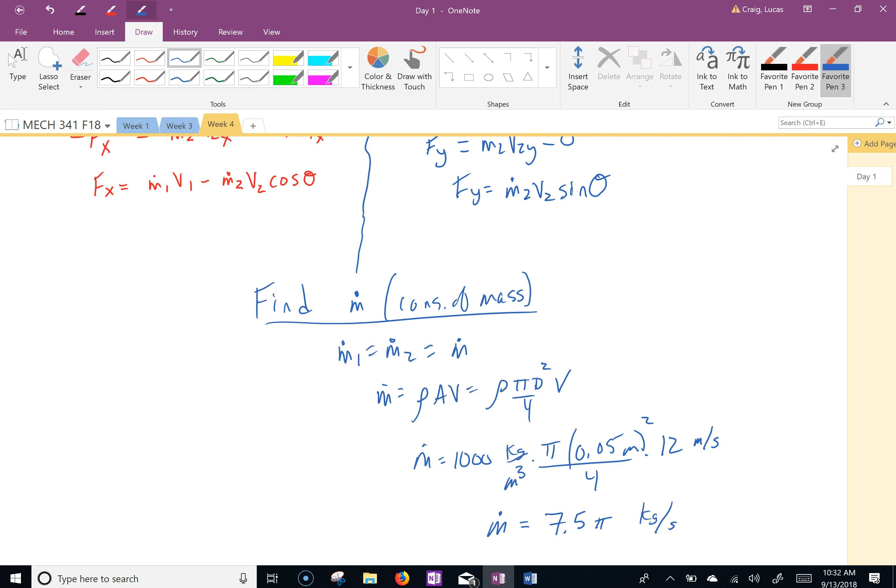Did I give you that? 12, okay. Now, I don't know why, but they left it in terms of pi. I didn't calculate it either. 7.5 times pi. I don't know, someone wants to put that in their calculator, you can tell me what it is, but I can't. I'm not Dr. G, I cannot do that in my head that good.

So it's probably going to be what? Yeah, 23, 24 or something? Yep, 5, 6. Thank you.

Am I losing anybody? Okay. All right, do we have everything else?

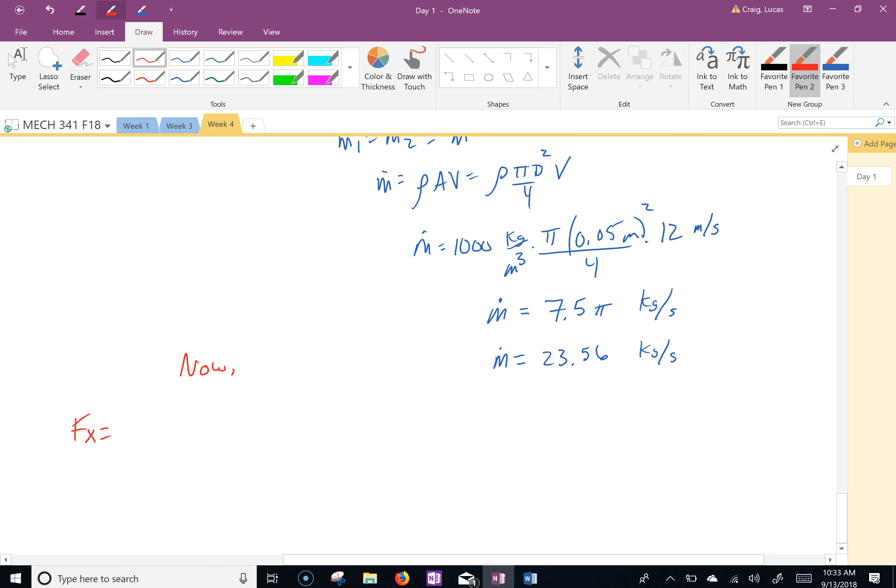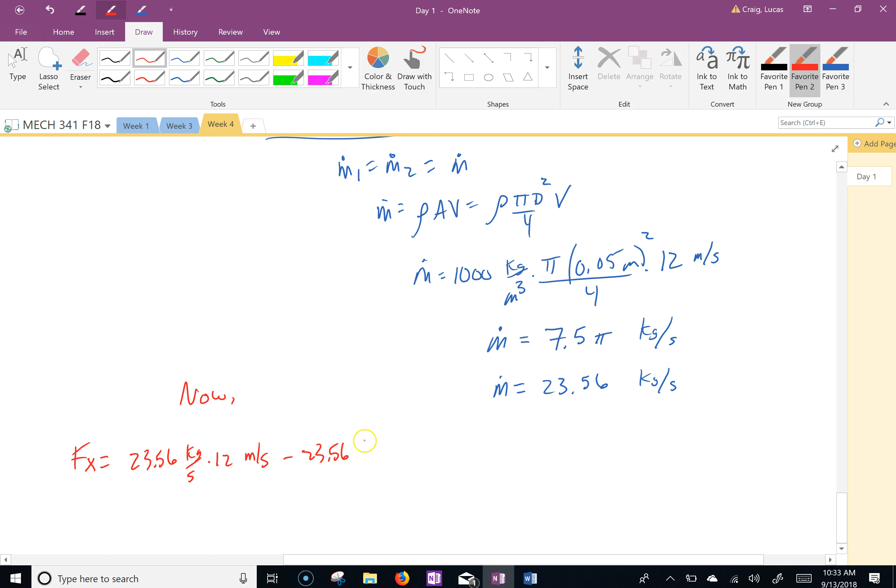And if you can check, they got 83 newtons. I think that's what I had, right? In last year's notes.

And then in the y direction, that was just m dot times 12 meters per second times sine of 45, and that becomes 200 newtons.

Is that right? The first one, is the first one wrong? No, yeah, oh, it's right. Check the second one too when you get there. I'll wait for everybody too.

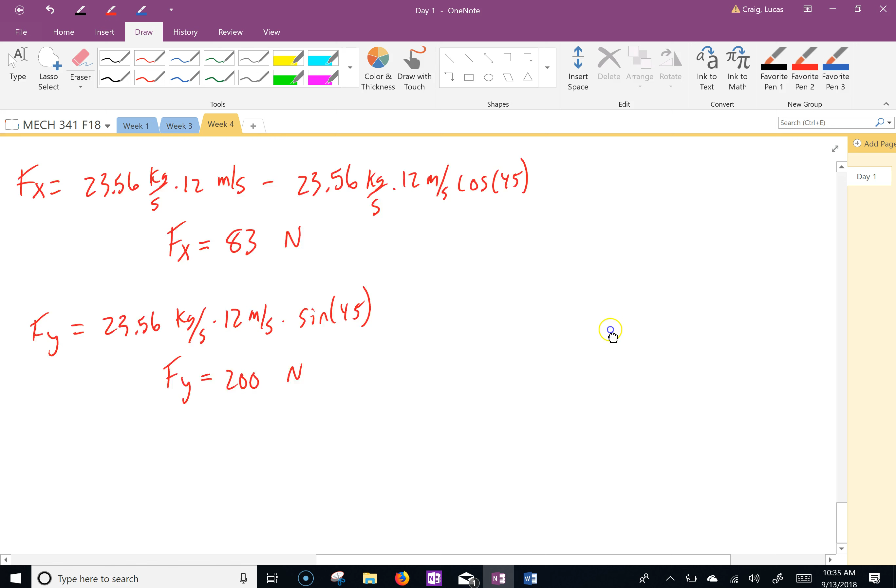And now we can finish it, right? Finally, it's really what we do, we add an extra step to these problems. So now we can do Newton's second law on the cart. Sum of the forces in the x equals ma x. Sum of the forces in the y equals ma y.

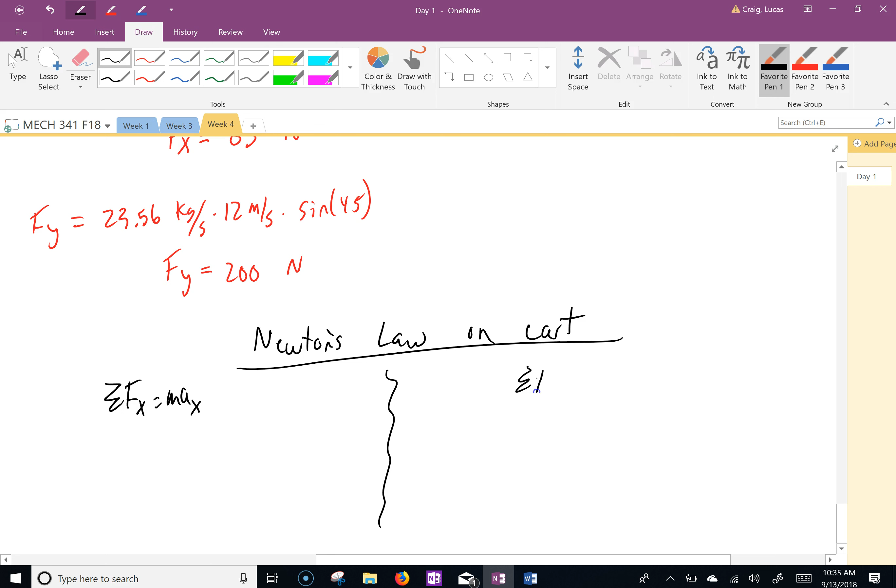Minus T plus f of x equals 0. Then we have normal minus f of y and minus w, right? F of y was down, normal was up, weight's down, and then equals 0. So T equals f of x, which is equal to 83 newtons.

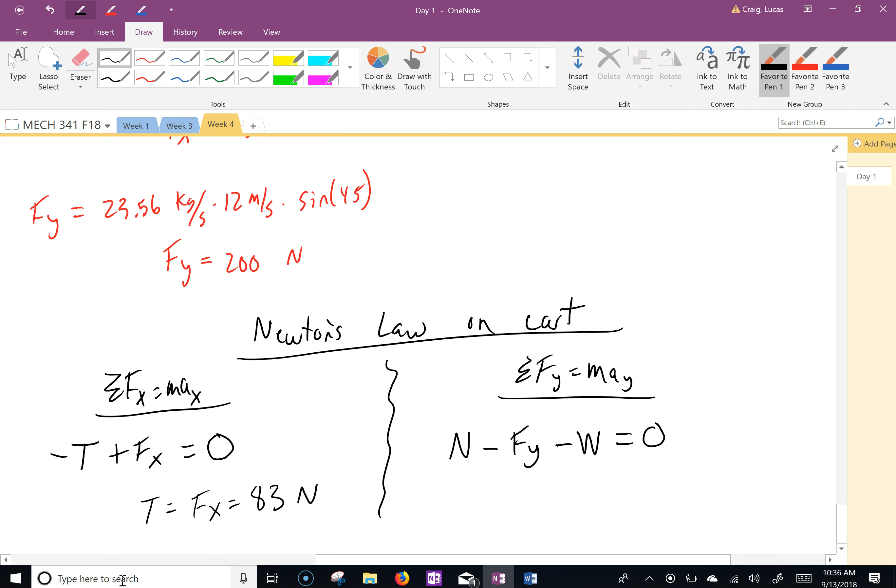Good. Normal force, Fy, plus the weight. 200 newtons plus 20 kilograms, 9.81 meters per second squared. We get 396 newtons.

Make sense? So just a few things. If we added the weight of the water on the cart, the normal force would go up, right? There's more weight now pushing down. And if there was friction on the wheels in the x direction, they actually help, right? So there'd be less tension, okay? So you could include those if you wanted to, but as long as you understand what we just did here, you could just add more forces, and that's fine. But you'd use the static coefficient of friction, right? Not the... yeah, so okay, make sense?